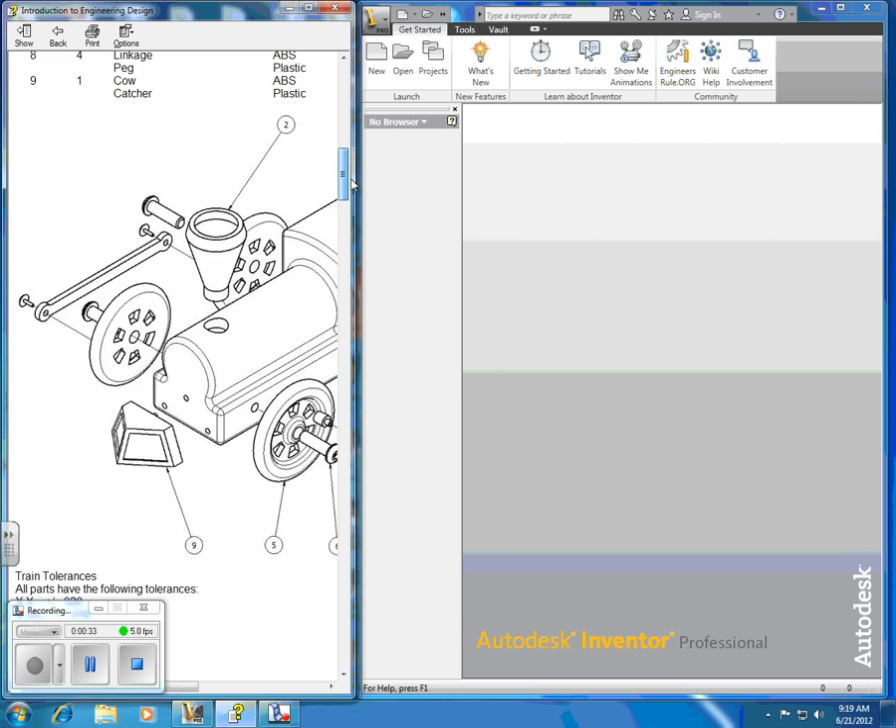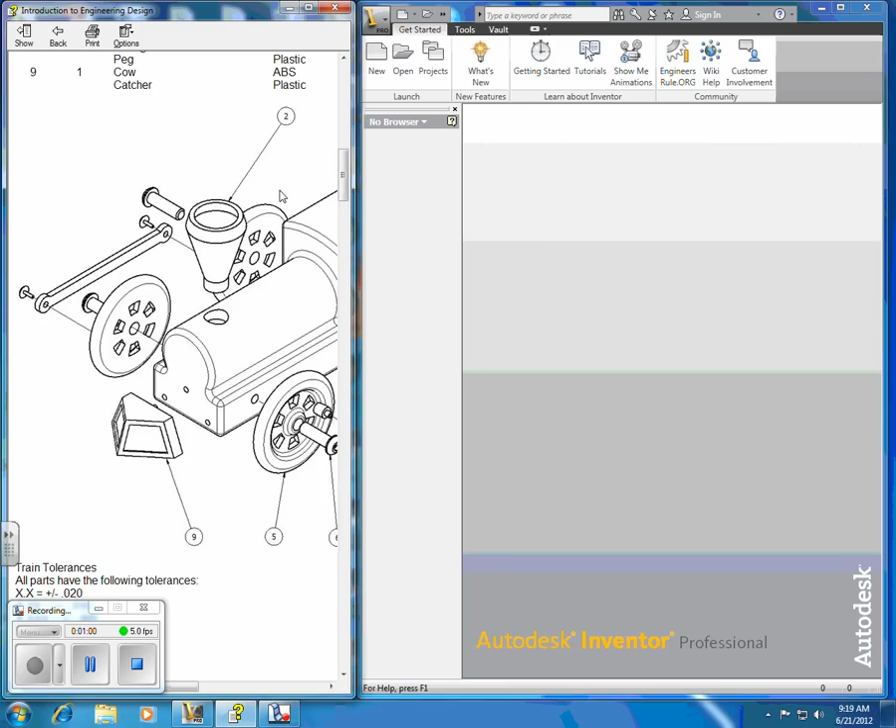For this project, what we're going to be doing is taking a series of train parts, and we're going to be inputting all of those dimensions and actually creating the 3D model. And then after we create all the 3D models, we're going to put them together into an assembly, and then we'll explode them and do an exploded assembly like you see here, with the parts tagged with balloons, and we'll also be able to create a parts list very similar to what we have here.

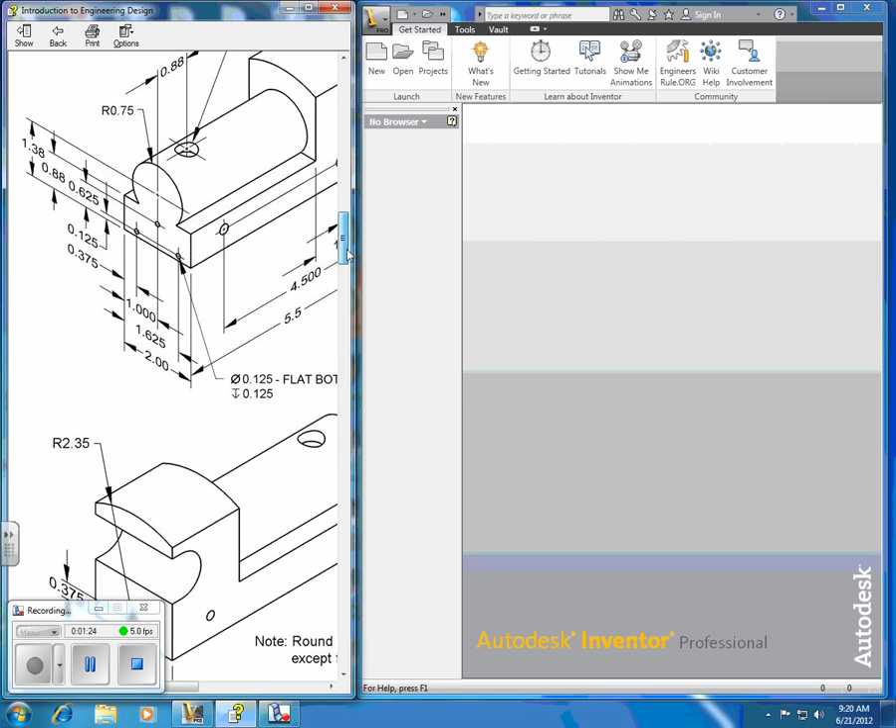And finally, we will create actual working drawings or detailed drawings that show each part in a 3-view front, top, and right side configuration. And that'll be later. So it's a pretty big project, but it's going to give you a lot of skills in Inventor and in creating the models, but also in drawing and detailing and putting in dimensions and all the specs that are needed to create that model in the factory.

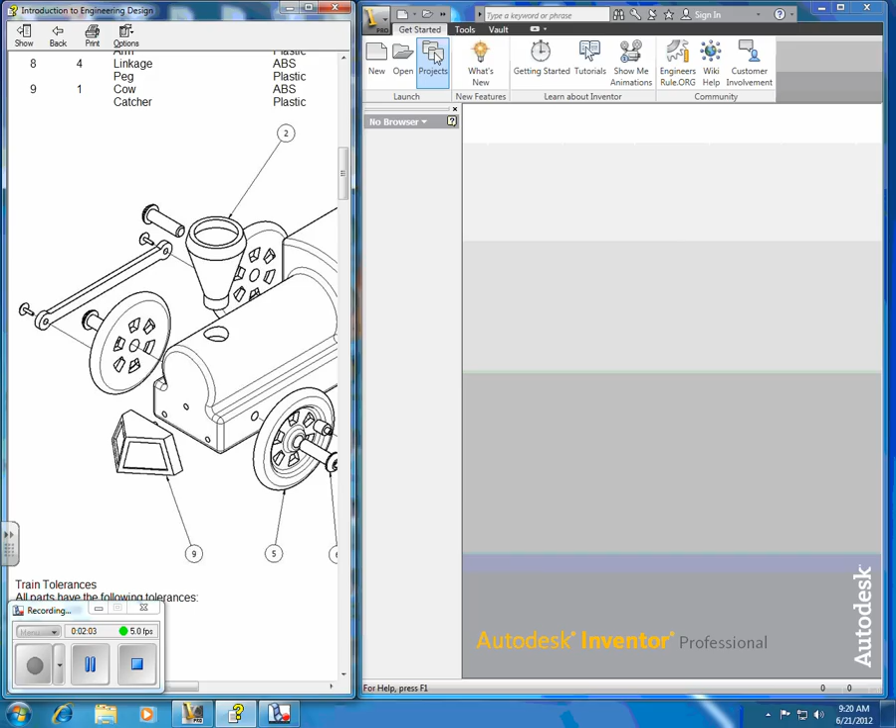So let's get started and take a look at the first part, which is the train body. And before I start any project like this, I always like to create a project within Inventor. So I'm going to come over here and click on Projects. And when I do that, this dialog box comes up. And as you can see, another project was selected, Button Maker. So I'm going to have to create a new project.

So to create a new project for the train, I'm going to go to New. And it's always going to be a single user project. We don't use any vault projects right now, and we don't have the software to do that anyway. So we're going to always select new single user project, and then we go to next. And then we're going to type in the project name, which is train. And really that's all you need, because we're not going to do anything else with that name.

And if you notice down here, it says project workspace folder. That is where all of your parts are going to get saved, unless you decide you're going to put them somewhere else. And I don't recommend you save anything in the C drive. The C drive is the hard drive that's on your particular computer. If that computer goes down, or if we lose the drive for whatever reason, or if you go to another computer, you will not be able to access that file.

So we're going to come over here to this button, which is the Browse button, and we're going to browse for a location. And I recommend you put your files in your P drive, at least temporarily until everything is done. If you put them in the O drive or in the K drive, you run the risk of somebody taking your parts or modifying them or deleting them, and you don't want that to happen. So to ensure the integrity of all your files, I would recommend you put it right into your P drive.

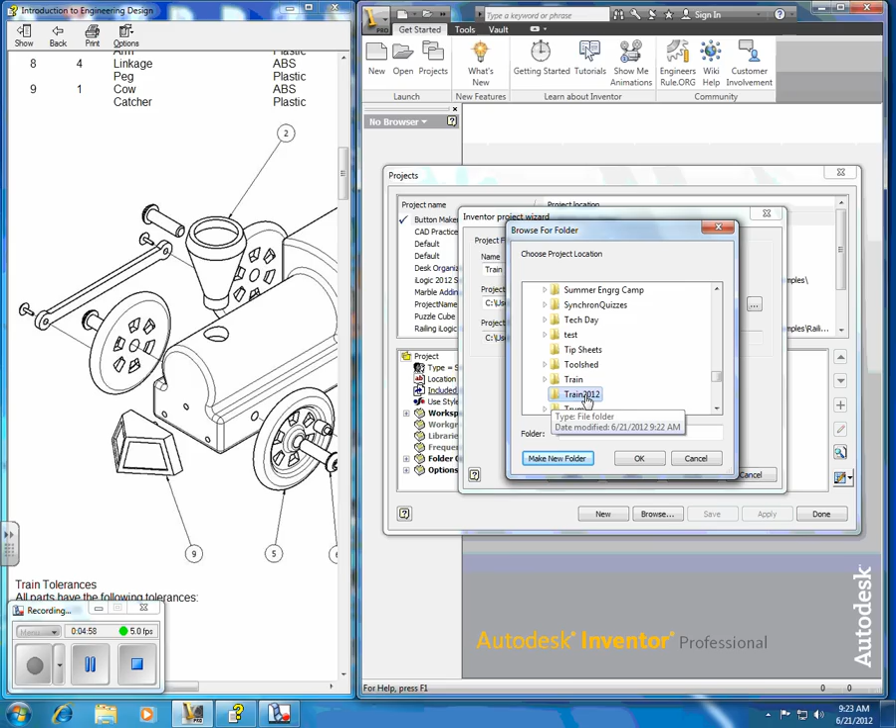And I think I already have a folder called Train because I've done this so many times, but I'm going to give it a 2012. I know I don't have a folder with that name. All right, and there it is. See, there's the one that I created previously, which I did in March when I was teaching this. And this one here is a new folder that I've created for this presentation. Okay, so now I have that folder, and what I'm going to want to do then is also just click on that.

Okay, so that's selected. Make sure that's selected, and then press OK. And if you notice, P drive / train 2012. So that's where all your parts are going to get filed. And that really comes in handy, especially if you're putting in lots of parts. And the thing you want to remember with Inventor is once you create an assembly, do not change the name of the parts that go into that assembly, because then the assembly will not find those parts.

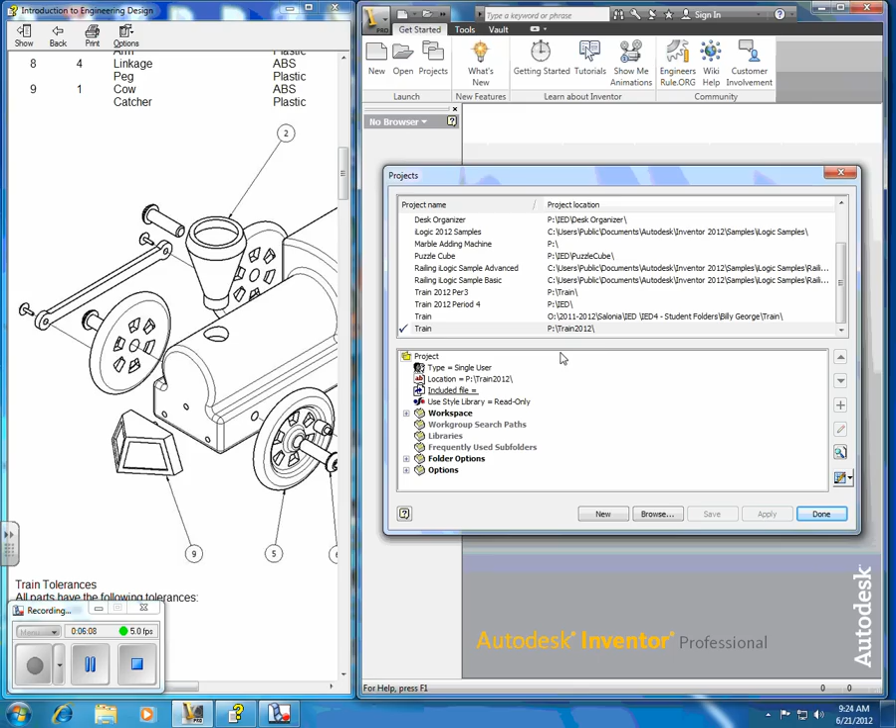Okay, so we've got that all set, and after you do that, the IPJ right here, that's just a suffix that means that is the folder. So we have in our P drive train 2012 and train.ipj. Okay, and we're going to go finish. And if you notice, there it is. Okay, P train 2012. And when we create the new part for the train body, it'll be appended right here. Okay, so press done, and now we're ready to go.

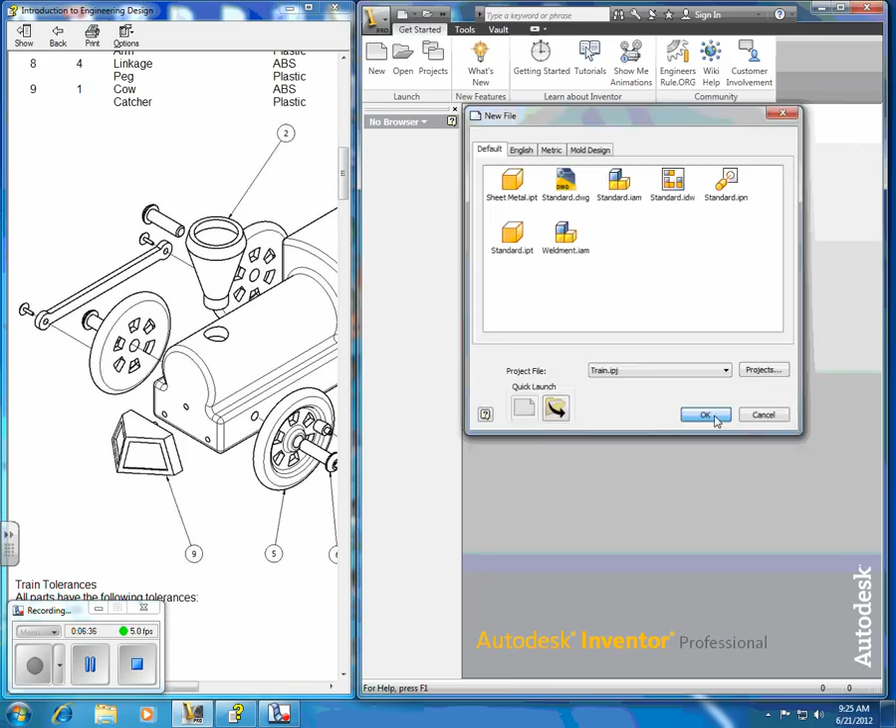So let's start a new part. And remember, don't come down and hit sheet metal. It's right here, standard.ipt. And you can either double click on it, or you can click and then click down here, OK. IPT, by the way, means Inventor part. Okay, that's where we always start with an Inventor part. Press OK, and you should get the grid coming up. When you see the grid, I like to keep it on grid because I can tell right away that I'm in 2D mode as opposed to 3D.

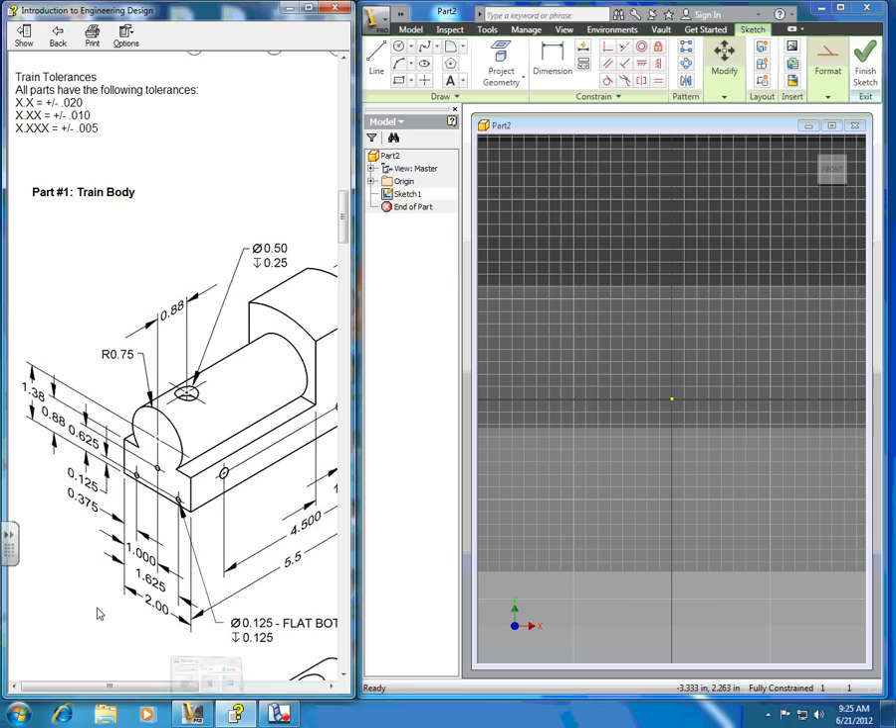And I'm going to take a look at the train body, which is the first part. And notice there's some general tolerances here, and that eventually will go on the drawing, but we don't have to worry about that right now. All we're going to do for this exercise is just copy all of the dimensions that you see here. Okay, and I'm just going to minimize this. All right, so let's get started.

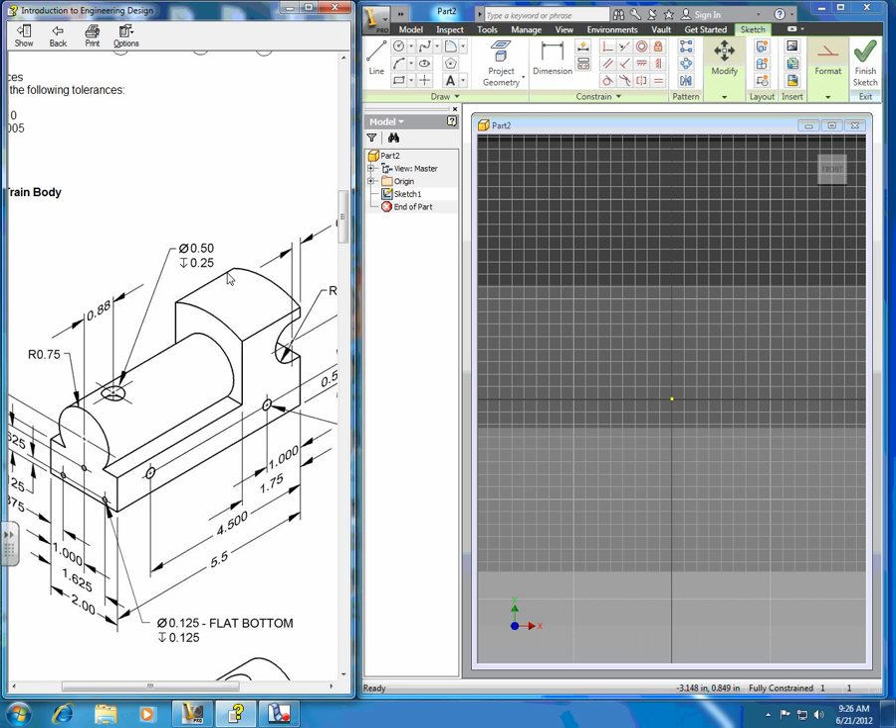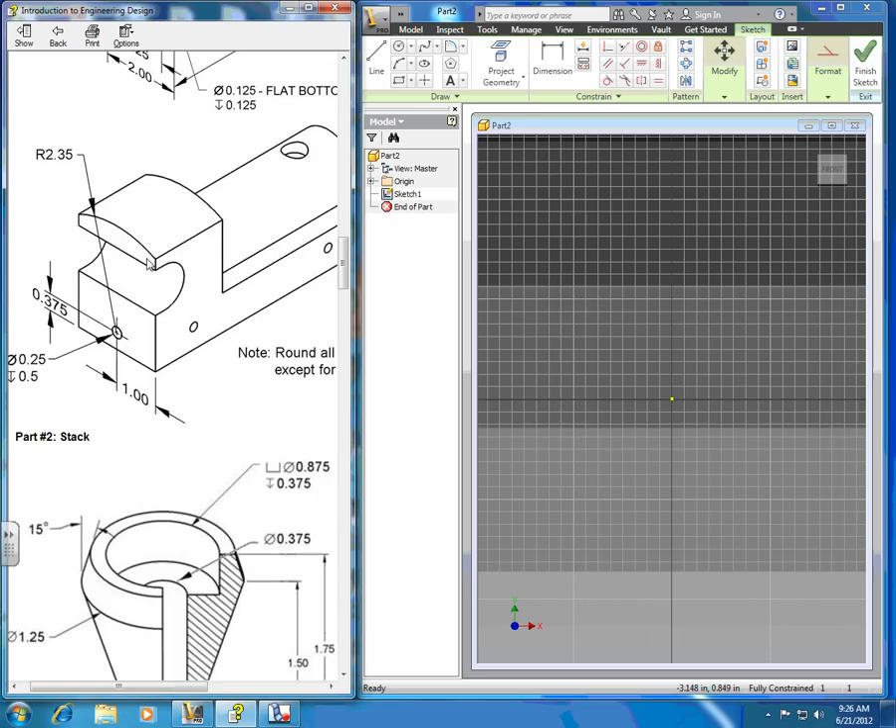Now, when we start to figure out how we're going to do this model, we want to try to think about how it'll be extruded. And we have this shape here, and we have this shape, and we could also do it this way, but we may have a little trouble doing that. So what we're going to do is the back side of this. I'm going to key in on this shape right here. So that's what we're going to draw first. So in order to do that, we have a couple of specs here. We need the height, we need the width, and then we need this radius right here. And this is all in inches, by the way.

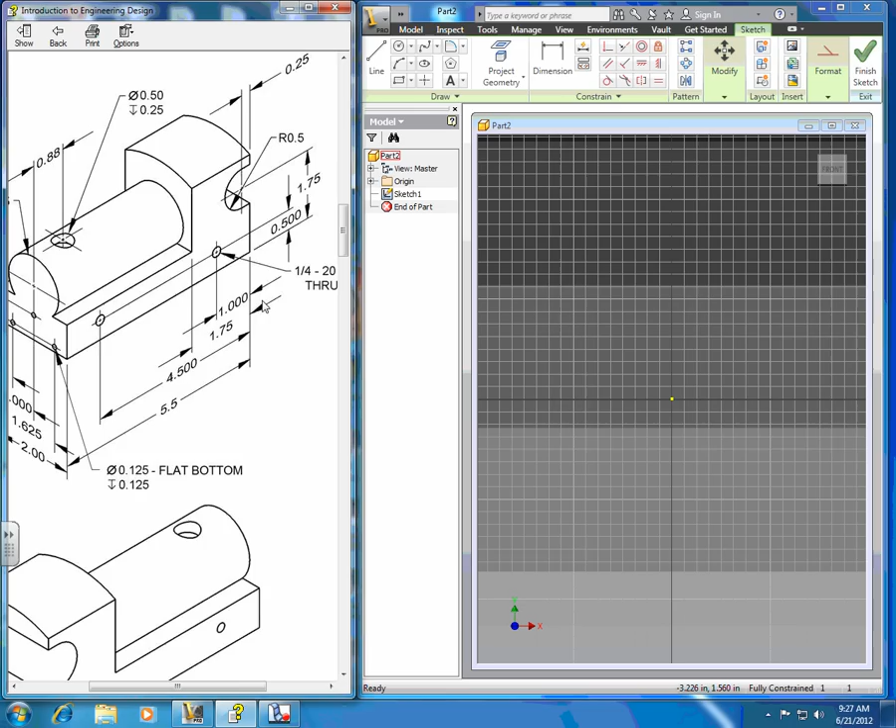All right. So how do we do that? Well, we are going to have to look at both drawings. We know that the width from here to here is 2 inches. And it's the same all the way back, so we don't have to worry about that, even though we're doing the back side. 2 inches wide, and it's a certain height. We don't know exactly what that height is because the height is determined by this radius here. So how can we do that? Well, we're going to have to put in our width, and then put in a point that's a certain distance away from the bottom, and then put in this arc, and then just kind of connect it. So let's see how we can do this.

We could do it a couple of ways. Well, let's do a rectangle. If you start with a rectangle, you're ensured that, number one, you have a closed loop. And also all of your corners are automatically 90 degrees, because that's the definition of a rectangle. All of your corners have to be 90 degrees. And we know that the width has to be 2 inches, so let's put that in. Dimension 2 inches.

Okay, and in terms of the height, we're really not sure yet how tall this has to be, but let's put in a point. If you find the center of this line, and then navigate up where you see a little dotted line, you're ensured that you're putting that point right in the center of this line, which is where we want it, because it has to be 1 inch away from this edge. And it has to be 0.375 from the bottom, so let's put that in. Click on the bottom edge, click on the point, and then bring it over. And that has to be 0.375.

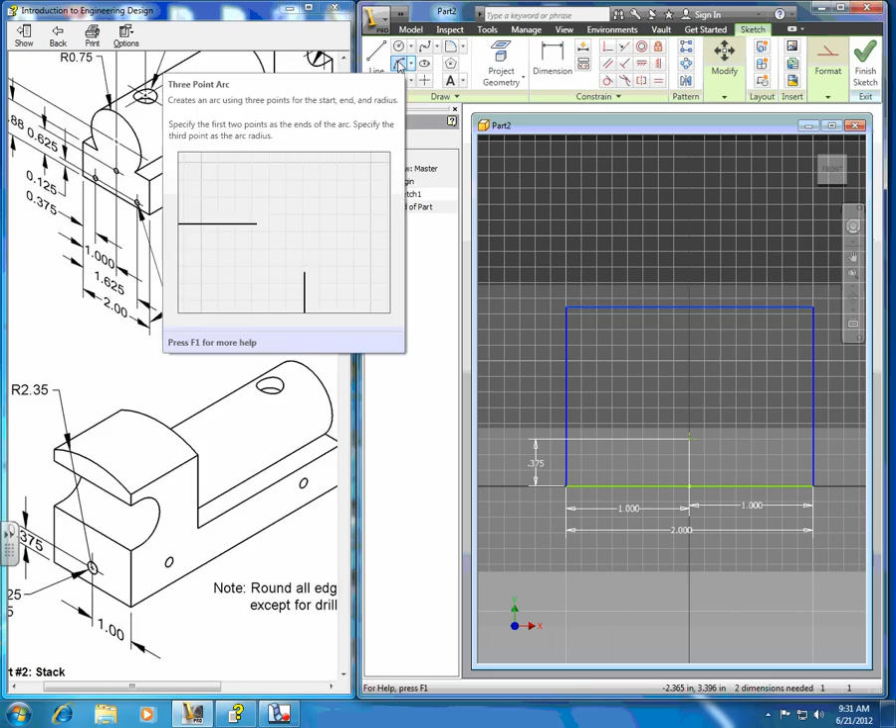Okay, and we're going to click on this edge. Then we're going to come over and click on this corner, and then bring it up. And we'll just leave it like right about here for now. I want to go somewhere above that center point that we just did. Okay, all right, so there it is.

Okay, and the other thing we want to do is put in a dimension, and if we look over here, it's got to be 2.35. So let's do that, dimension of this arc. So I'm going to click on the arc itself, and that has to be 2.35. Okay, so that gives us the correct dimension. But notice the point is way down here. Well, that point is supposed to be way up here.

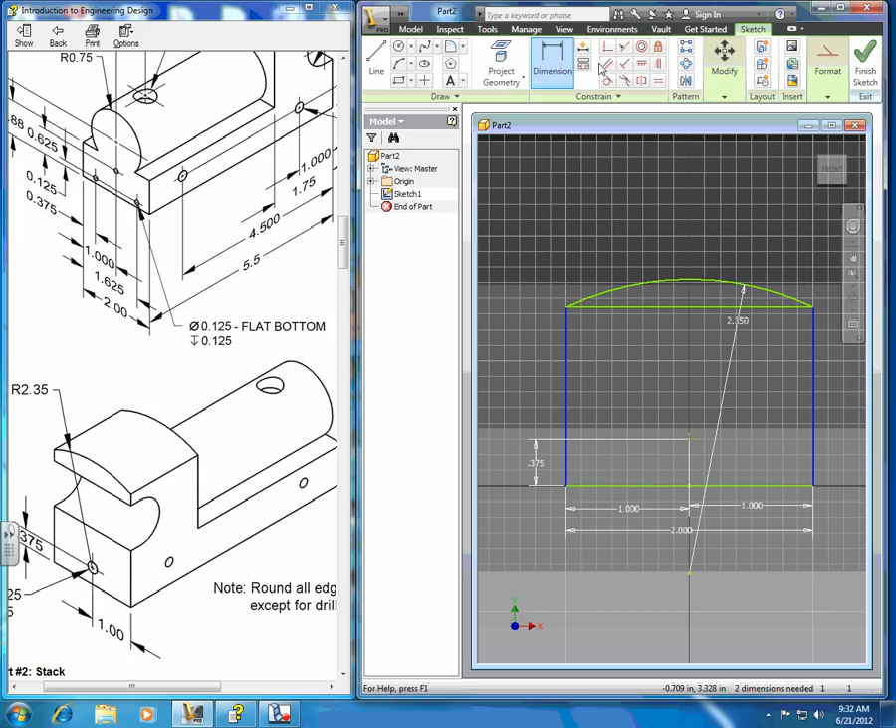So to change that, what we can do is go to one of our geometric constraints. It's called coincident. Coincident means we want this point and this point to share the same space. So this will be right on top of, or sharing the same space with this point. So let's go ahead and do that and see what happens. I'm going to click on this point, and I'm going to click on this point that we created earlier, and there we go. See? So what it did was it extended the model, and now we've got the correct dimension for the height. Notice the height just changed automatically.

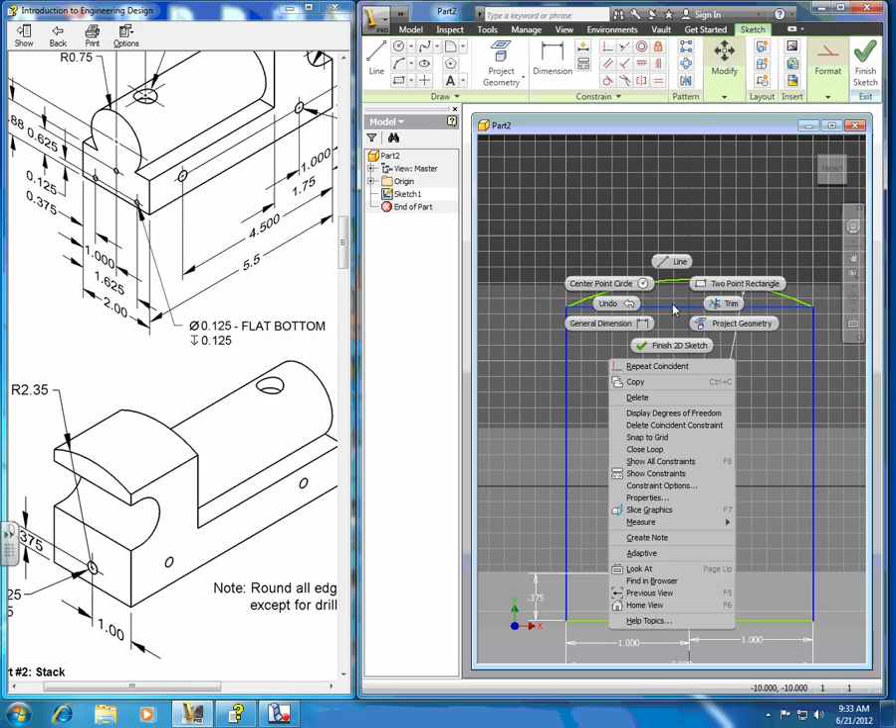The last thing we want to do is remove this line. Now there are two ways you can do that. The first way is just to right click on it, and well, first you have to get out of the command that you're in. Right click on that line and delete, which is down here. Okay. Or what I could have done was I could have just clicked on under modify, trim.

And the thing you want to remember about trim: trim works as long as there's no dimension on that particular line. If there's a dimension placed on that line, the trim command won't work, and you'll have to get rid of the dimension, then trim, and then put the dimension back in if you want to keep that dimension constrained to that number. Okay, so now we have the basic shape for the train body.

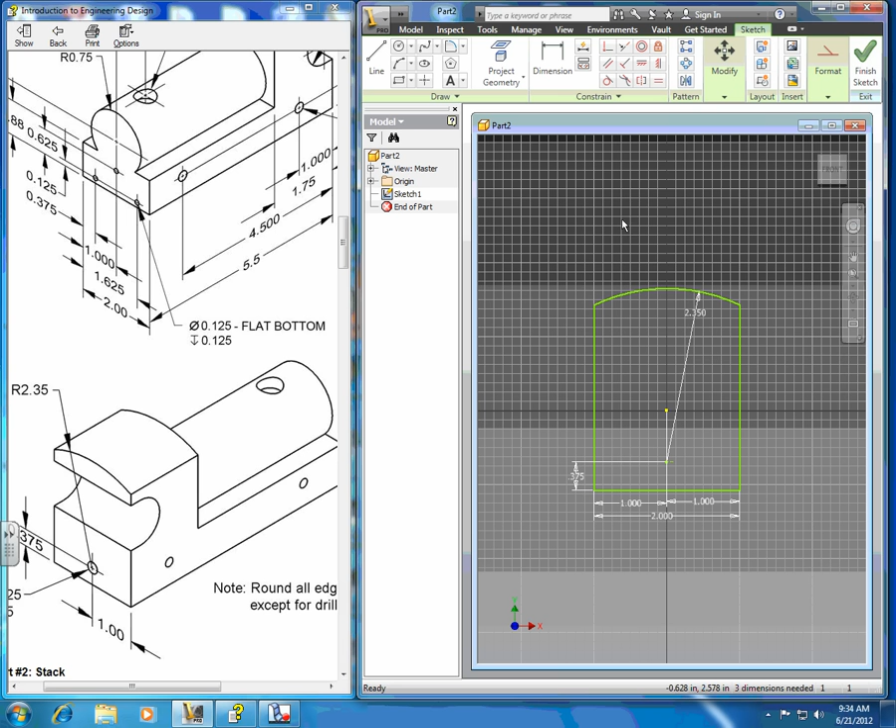Okay, and that's good enough. Don't get into the situation where you're trying to do a lot more than you should be doing. At this point, we have this shape here defined, and we're going to extrude it back this distance, which is 5.5. All right, so let's finish the sketch.

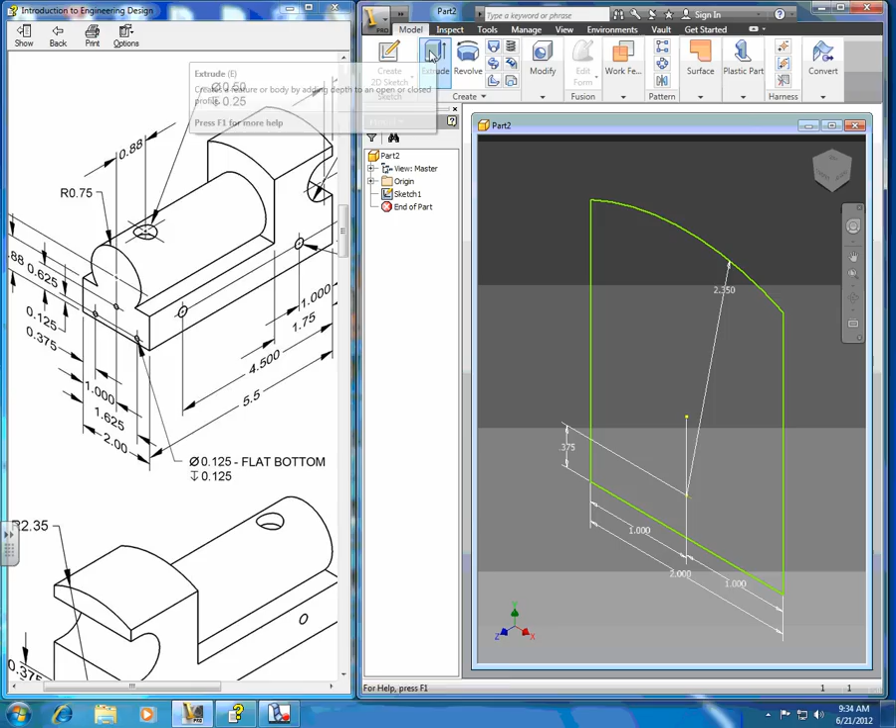And we're going to go to the extrude command, and we're going to put in the length, which is 5.5. All right, and I'm just going to zoom out a little bit by just turning my little jog wheel on my mouse, just like that.

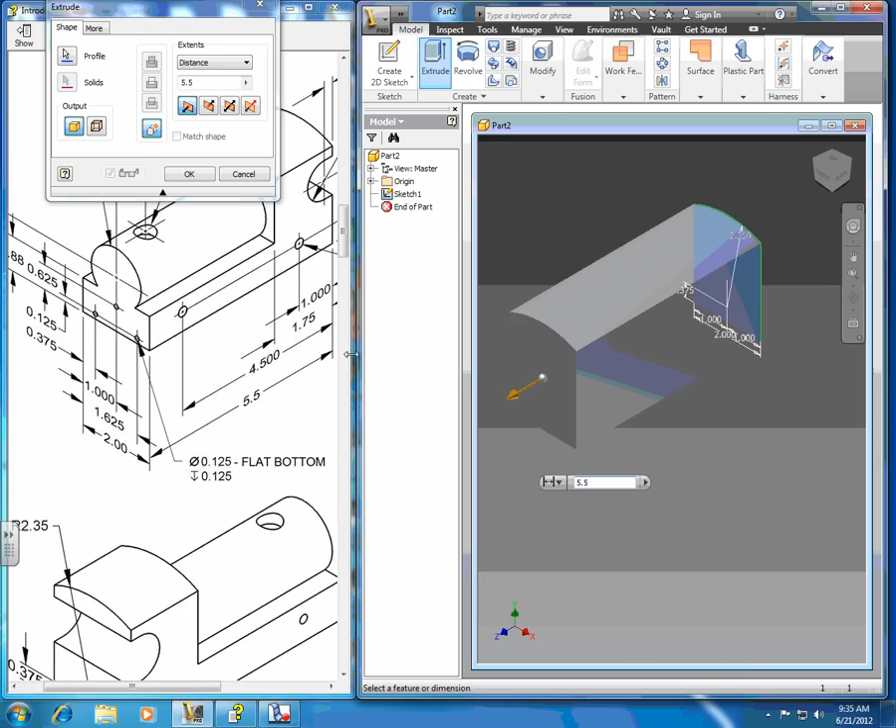And I'm extruding this way because remember we did the back, or the right side, if you will, of the part, right? So this is going to be the front of the part. This is, actually, yeah, this is the back. This is the front, so this will be the right side, and that is the back. All right, we got 5.5 put in. It's going the right way. We press OK. All right, so now we have our train body, the beginning of it.

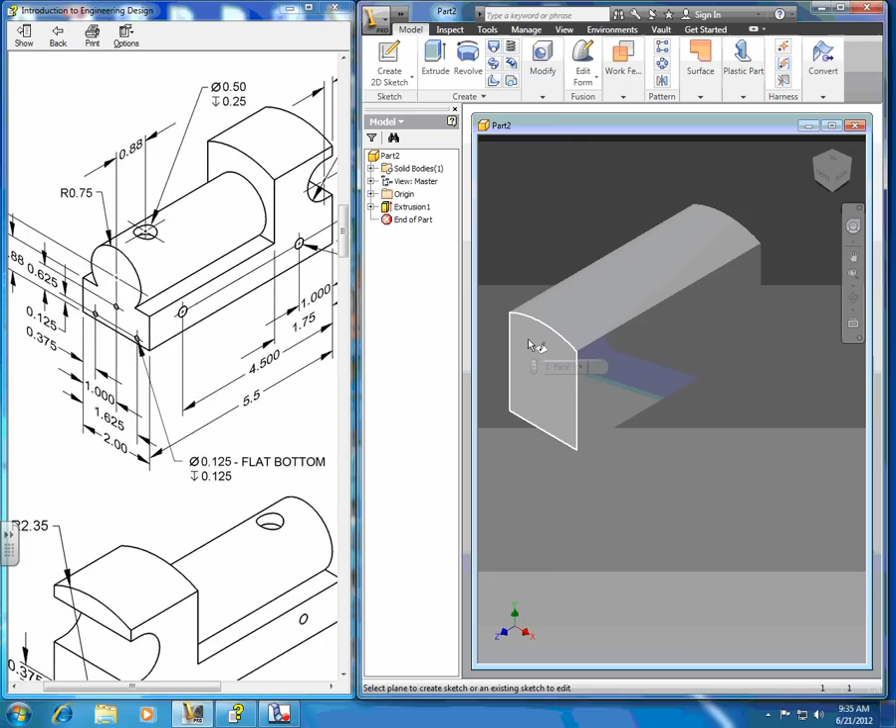All right, and that was called an additive process because we added material to a profile. Now we're going to do a subtractive process, which removes material from an existing shape. So to do that, we're going to create a 2D sketch right up here, and we're going to go to the front surface of the train body, and notice now we have a sketch, and we're going to try to put in this geometry right here.

Now when I look at this, I see a rectangle and I see a circle. Okay, so let's go ahead and do that. Let's put in a circle, and I'm going to start it maybe over here somewhere. The thing you want to be careful of too is if you hit the origin when you're making that circle, it'll actually force that circle to be tangent to that center mark, and then once you do that, you're not going to be able to change the size of the circle. So you want to be careful that you don't hit any existing points when you're making that first circle.

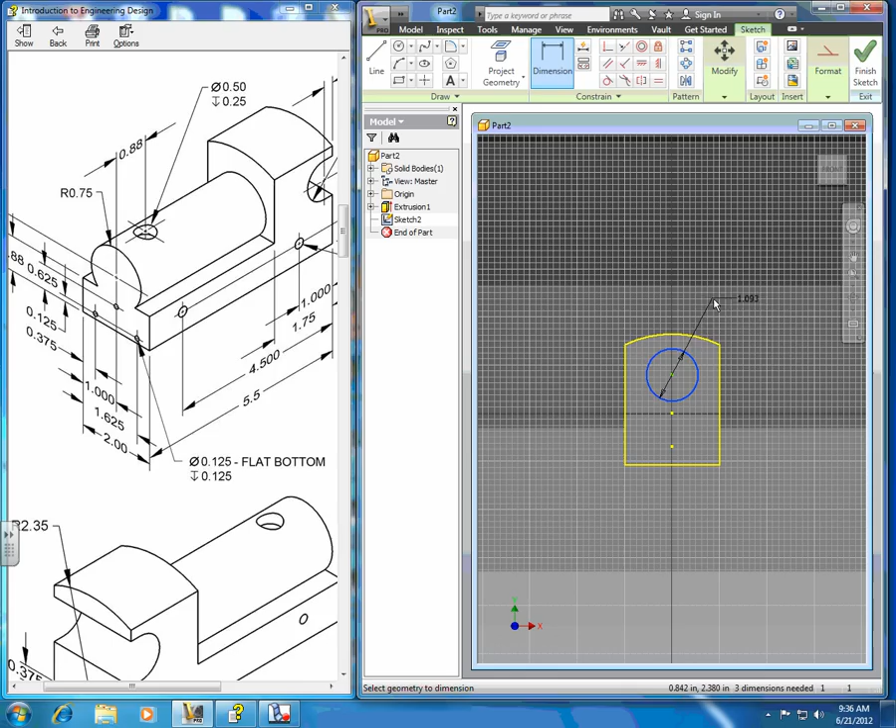Now that circle isn't the right size and it's not in the right location, but we're gonna fix that next. So let's go to dimension, and let's dimension the circle. Now if we look over here, we see that the circle has a radius of 0.75. But when we put this dimension in, we're putting in the diameter. So we're going to have to take 0.75 and multiply that times 2. And a really easy way to do that is just to type in 0.75, and then you're going to go Shift 8, which is the asterisk. That means times 2. And hit the check mark, and now we have the correct size circle.

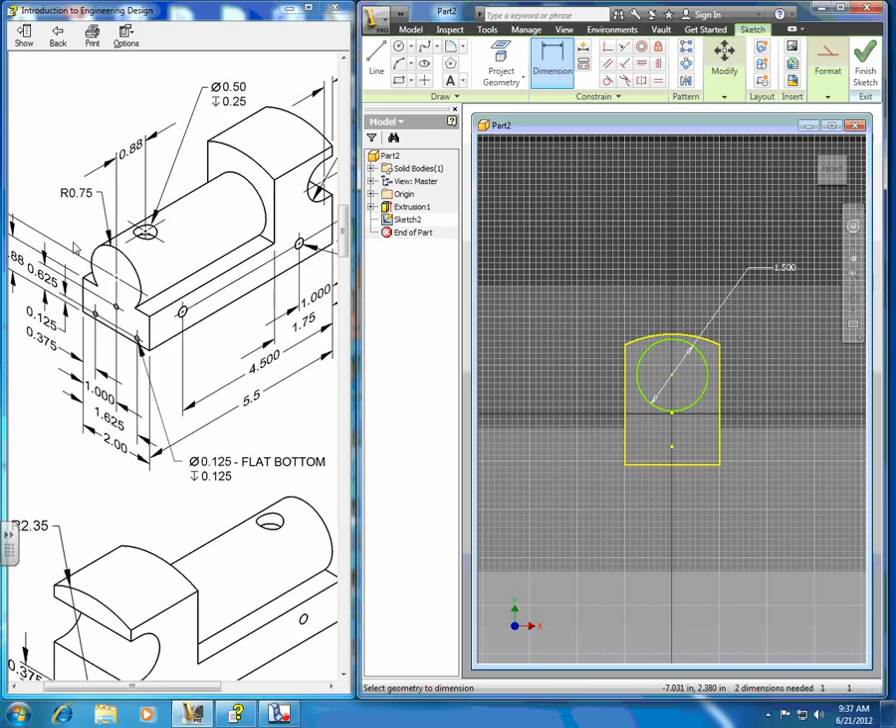Okay, but the circle isn't in the right location. It's got to come down from the top. See where it is here? So we have to locate that circle. Well, how do we do that? We come back to our drawing here. We see that the circle has to be in the center of the part. Okay, 1 inch. So if you go right to that center mark for the circle, and you just come down the extension line, you see that from this edge to the center of the circle has to be 1 inch. So let's put that in. From this edge to the center of the circle has to be 1 inch, which it is. I just happened to drop it in the center.

But now for this dimension, remember we always locate our circles from both directions. We have to locate them horizontally and vertically. So let's do the vertical distance, and the vertical distance has to be 1.38. See it? 1.38. So let's put that in.

Okay, looking good. Now what we need to do is draw, and we could do this again a couple of ways. We can either draw a rectangle or we could just draw a straight line. Let's just draw a straight line. And we're going to start at this edge, and make sure you're right on the edge when you start. You can kind of tell because you get that line there. Start right there, and just click, and don't worry about the location right now, but see the little perpendicular sign? Make sure you're drawing a perpendicular line. You're going to end right there on the other edge.

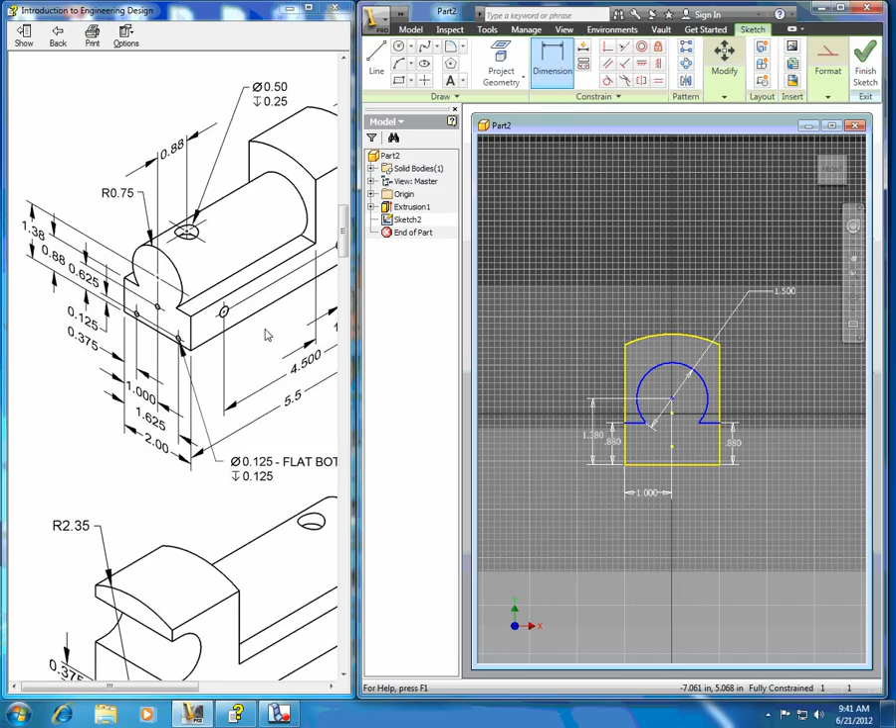Okay, so now we have kind of a boundary that allows us to cut this material away. We're going to cut this material away, but we're not going to cut it all the way through, because otherwise we wouldn't have the cab portion of the train body. Okay, so we're going to cut, but we're only going to cut this far. Okay, so let's finish our sketch, because there's nothing more to do here.

And we're going to select Extrude, but this time it's going to be cut. Okay, when you look at the box here, notice that, and same thing over here, you can do it either way. You can work out of this box, or you can work right over here, whatever's easier for you. But if you click on Profile, you're going to click where you want to cut out material.

Okay, and you always want to make sure too that if you're going to cut, this is the cut button right here. This is Extrude Join, which adds material. This is Extrude Cut, which cuts material away. And this is Intersect, which just cuts the intersection of the two shapes. So we want this one, which is cut. And we're going to click on this profile.

And notice it's going all the way through. We don't want that. So we need to figure out how far to go. Well, the entire length of the part is 5.5. And this part is 1.75. So we want to cut 5.5 minus 1.75. All right, so let's just put that in.

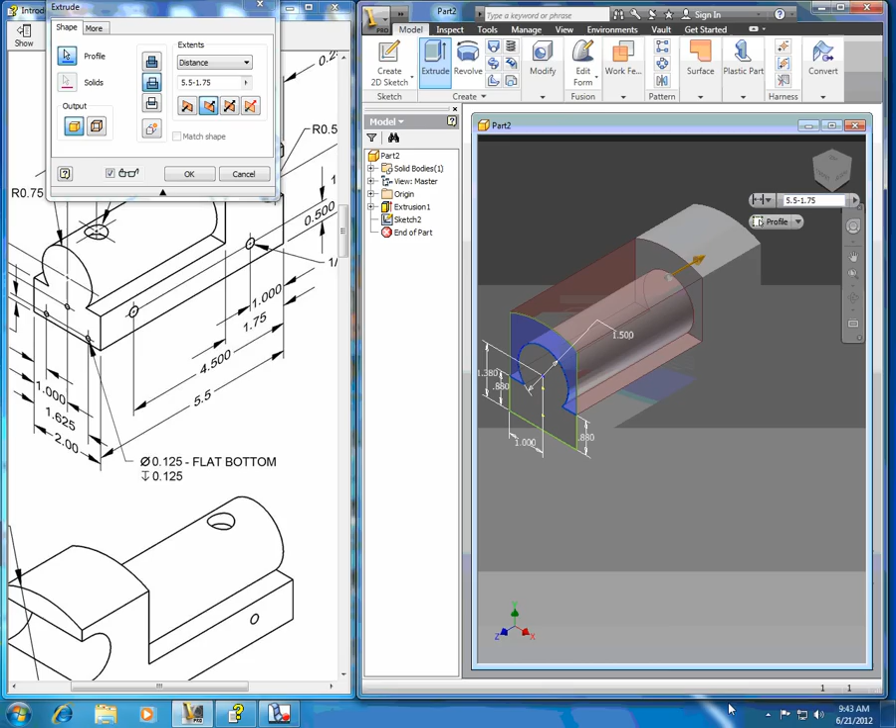5.5 minus, now see, that was highlighted, so what I should have done was just hit the cursor after it. 5.5 minus 1.75. And there we go. And if you press OK, it makes the cut. Okay, so there is a roughed out version of our train body.

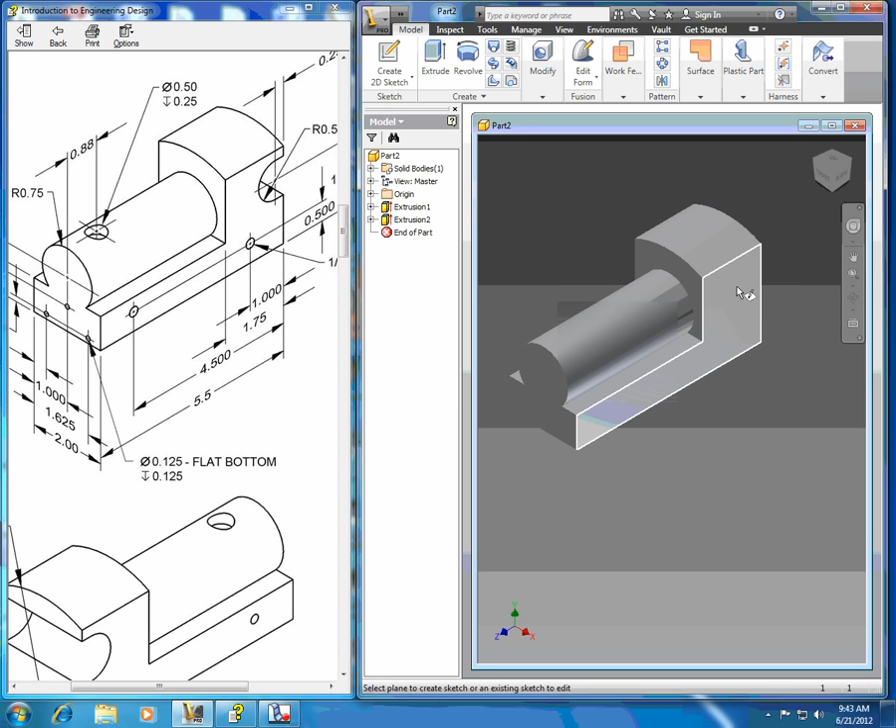Now we're not done yet. We still have more cutting to do. So let's cut out this D shape right here on the cab. Let's do that next. So we're going to need to create another sketch. Create 2D sketch. We're going to put that sketch right here. Click on the side. Okay.

And if we look at this carefully, the circle is here, but then there's a straight portion. So the center of the circle is not going to be on the edge. It's going to be in 1/4 of an inch. You see the speck right here. Okay. So the center of this circle is going to be 1/4 of an inch in, and it's going to be 1.75 inches from the bottom.

So let's go ahead and do that. Circle. And again, be careful. Don't put your circle, the center, on the edge, because you won't be able to get it off.

It'll constrain that center to this edge, and you'll have to get rid of the circle and or eliminate the constraint and redo it. So let's bring the circle in here somewhere. And again, when you're bringing it out, don't hit the edge. See the little tangent sign there, right there? What that would do is force that circle to stay tangent to that edge, but we don't want that. So we're just going to put it right there for now.

Notice the circle is green, so that means you can move it around. It's not constrained. Well, let's constrain it to the proper location. We also have to make the size correct, so let's do that. Remember, circles and holes need size and location dimensions. So we'll click on dimension, click on the edge of the circle, not the center, the edge.

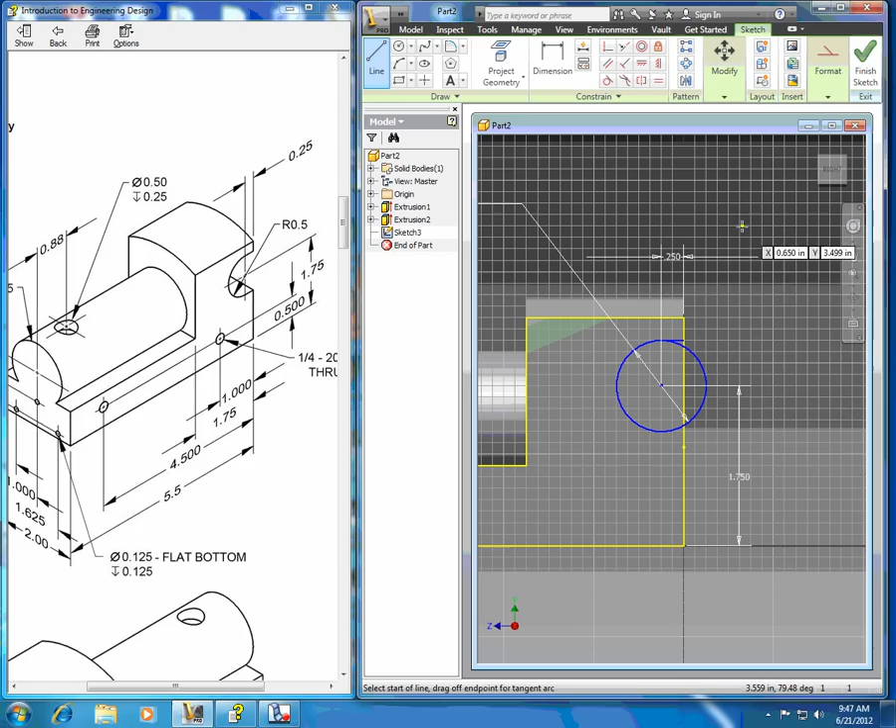Okay? If it comes green, that means you probably didn't hit the top in the circle, and it's not tangent. And I'll show you how to make it tangent in a second. All right, we have to do the same thing with the bottom. We're still on the line command. Now, say if I just was a little bit off here. Let's see if I can do that. I'm doing this on purpose here, just to show you. All right, it's a straight line. It's a horizontal line, but it's a little bit off from the circle, and I'm clicking on the very edge of the part. Notice it's green.

Okay, so if your line like that is green, you want to make this line tangent to this circle. So how do you do that? Well, we have a little geometric constraint here called tangent. So click on that, and we want to make this line tangent to this circle. And there it is. Okay, so it's as simple as that.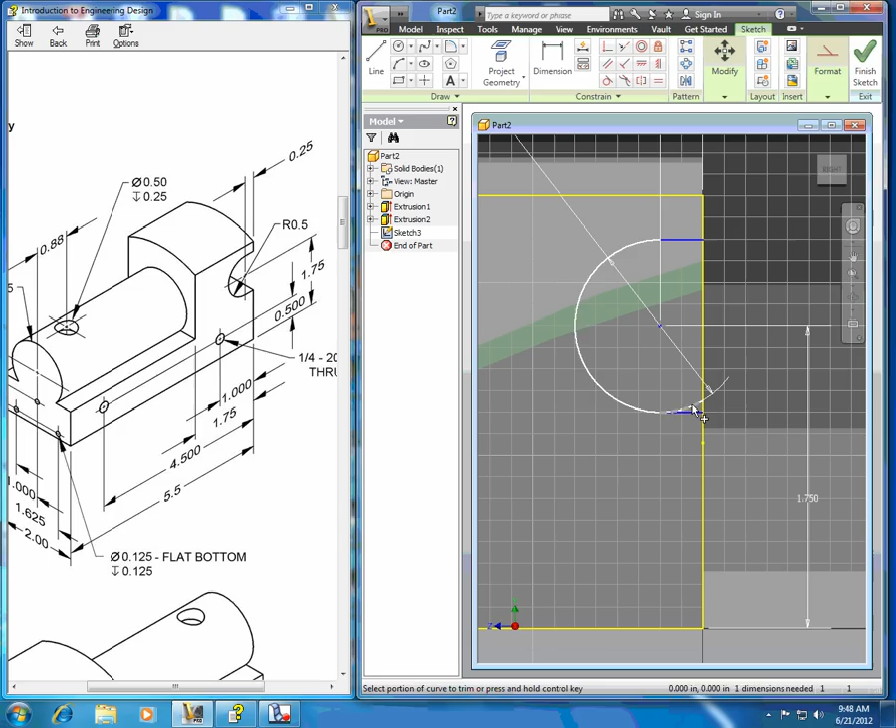Now we want to modify, trim the lines that don't belong. And we'll get rid of this line, and this line, and this line. And now we have our D shape that we want. Finish the sketch, and extrude cut. Oh, look at the save reminder. Part 2 and its dependents have not been saved, so click here to save. Okay, so that's probably a good idea to do. So let's save it.

And remember, we have to give it a name the first time, and we're going to call it train body, because that's the name of the part. Don't name it anything else. You want to name it the same way that it's named in the tutorial, train body. Don't worry about the part number right now. We can put the part number in later. Save. Okay, and notice how it changed right here. So if you look up here, this is the part that you're working on. Train Body.ipt is the file name for this part.

Okay, so let's continue. Extrude, cut this profile. You want this, not that. You want that profile. And notice it goes all the way through. That's fine.

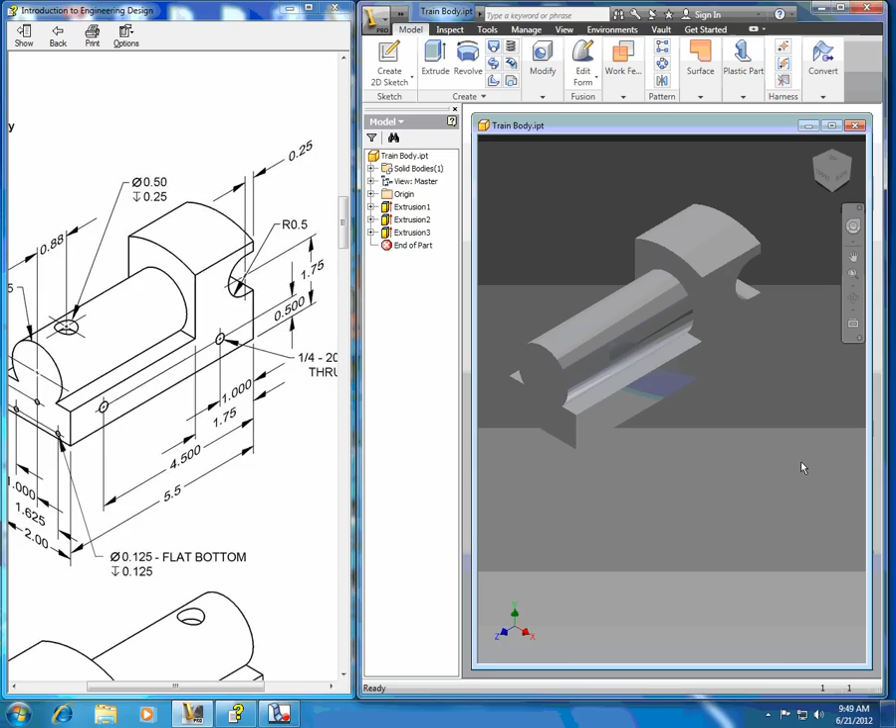Okay, as long as it's going all the way through. And if we press OK, it makes the cut, and that part of it is done. Okay, now let's put in some holes.

Now, if we look at these holes, we have to again look at the holes carefully. This leader line is pointing to one of the holes, but it's the same thing for all three. How do we know that? Well, it's kind of implied, but really what they should have said was either typical or 3 times or 3 places. So we'll fix that when we do the detailed drawing.

It has to be a flat bottom hole, okay? And this little null set, which usually means 0 in math, that means diameter. So the hole has to have a diameter of 0.125 or 1/8 of an inch. It has to have a flat bottom. This little arrow pointing down means drilled to a depth of 0.125. All right, so how do we do that?

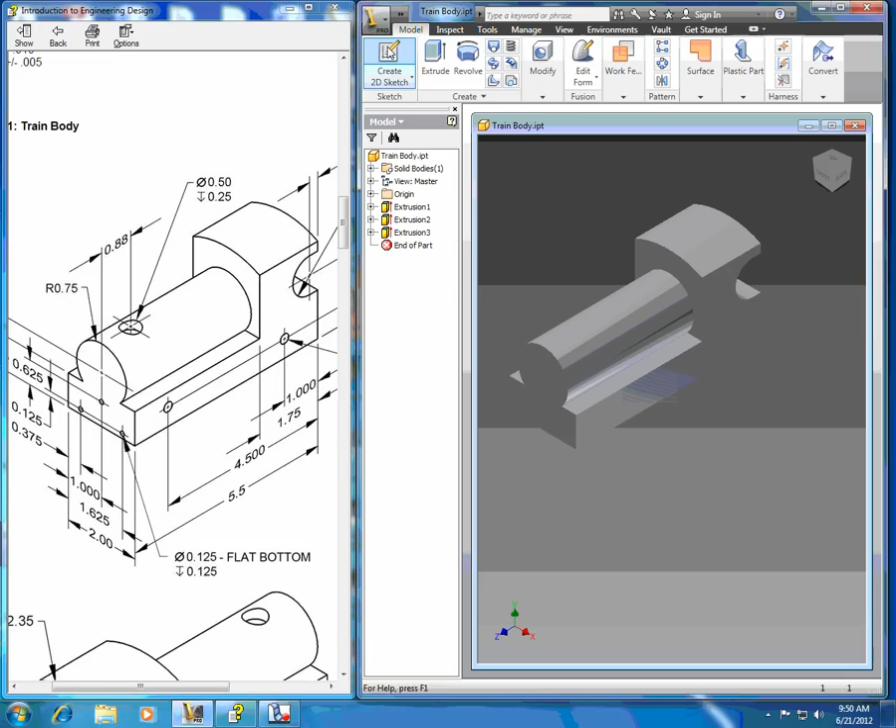Well, the best way to drill a hole is to create a point. So to do that, we need a new sketch, create 2D sketch, click on the front, and we're going to go to point, and we're going to put in 3 points. 1, 2, and I want to get it in the middle. So I'm going to start down here, find the green dot, and move up 3. Okay, I have my 3 points.

Now I have to locate them. So let's locate 3 points. Well, if we look here, datum dimensioning, they're all starting from this edge. So we're going to do it the same way. We're going to click on this edge, and we're going to go 0.375 to the center of the first hole, 1 inch to the center of the second hole, 1.625 to the center of the third hole.

So let's do that. Okay, dimension, edge, center, 0.375, edge, center, 1 inch. Okay, that one's good. Don't have to change that one. Edge, center, 1.625. Okay, now all of the holes are located properly in the horizontal direction.

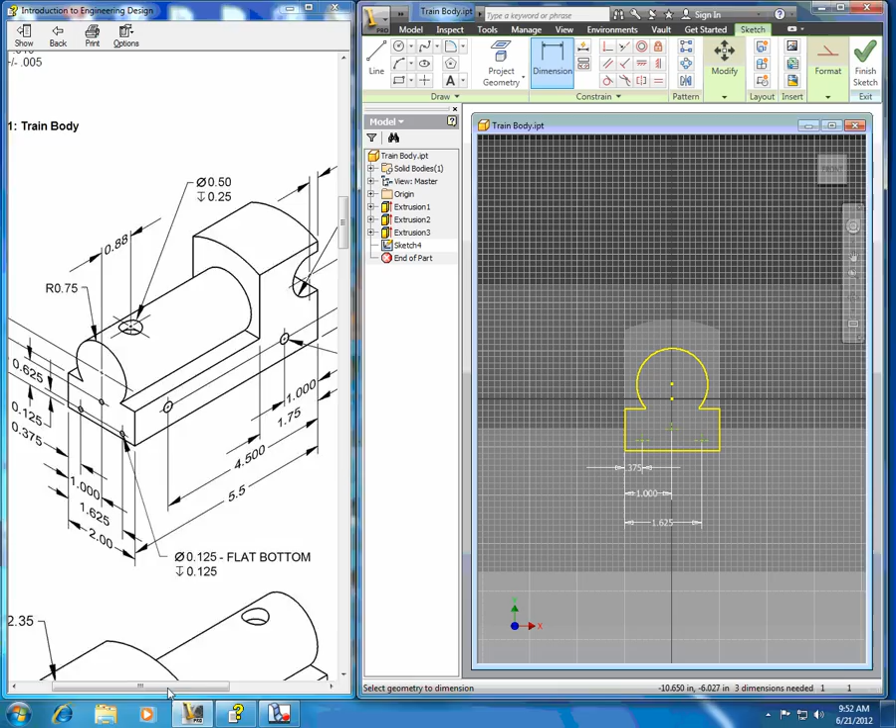Now we have to locate them in the vertical direction. So let's look over here at our drawing again. The first hole is 0.125 from the bottom. The second hole is 0.625. Now these holes are in line with each other. So you have to make sure that both of these holes are 0.125 from the bottom. You can't just change this hole and expect that this is going to go along with it, unless you make those 2 points horizontal with each other, which I can show you how to do.

All right, so let's do that. This geometric constraint is horizontal. Okay, so what that means is, if we press that, we click on the first point, we click on the second point, now they'll always be horizontal with each other. So if I changed the dimension of this point, this one should automatically update and be the same. Okay, so let's do that.

Dimension, bottom edge to the first point, and it's going to be what? Right here, 0.125. See how this one moved along with it, and they're in blue? So those points are fully constrained. They're not going to move now. Now we still have to do this one.

And that one there has to be, remember, 0.625. So let's do that. Bottom edge to the point, and we're going to come out here, and it's going to be 0.625. Okay? Right there. 0.625. Check. Okay. Now all 3 points are in the right location horizontally and vertically. And that is all we do to get the points started.

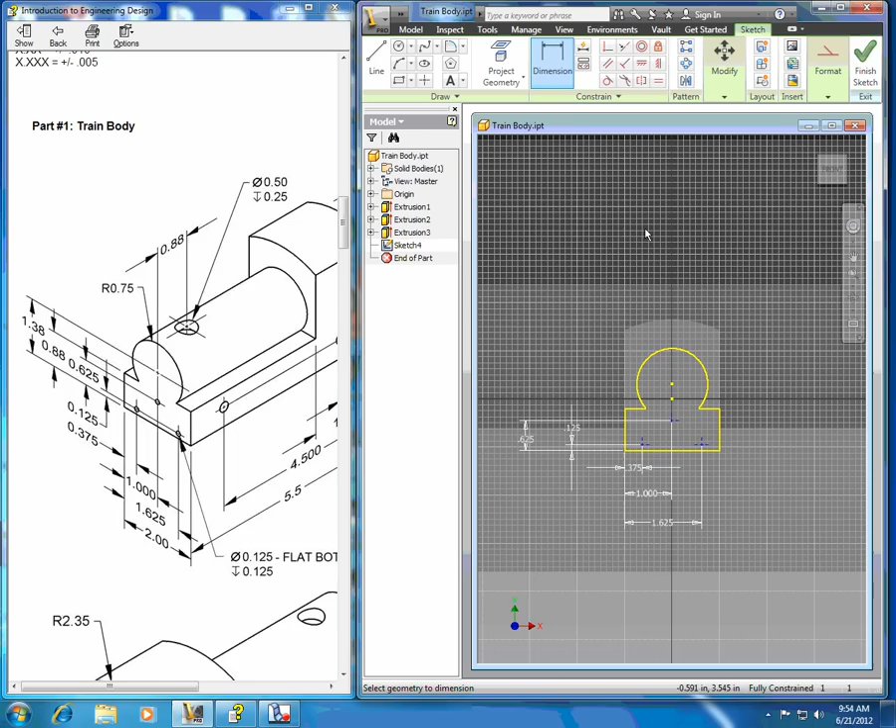All right, we need a center point. You can't drill a hole without a center point. So let's finish the sketch, and now let's put in a hole. A hole can be found under, where is it? It's around here somewhere. Modify. There it is. Okay, so modify. And you know, if you had your toolbar spread out, it would probably show. But because the toolbar is compressed, a lot of these commands are hidden under some of these higher level commands. So we're going to click on hole.

Now, we have lots of different options here. This is the one we use the most often. That's just a regular hole. And if you just kind of put your cursor there, sometimes it tells you what it is. In this case, it isn't for some reason, but this is a regular hole, regular drilled hole. This is a counterbore hole, which has this little shoulder to accept a bolt head, and it'll be flush, either flush with the surface or maybe a little below. This is a spot face, which is just a shallow counterbore, and this is countersink, which is for a flathead screw.

Okay, so we're gonna choose this one because we just want a regular hole, and it says flat bottom, so that means the drill point has to be a flat bottom. But let me see, it's not letting me do that, and that's because I haven't specified what centers. So if I go to centers, all of these should light up. Okay.

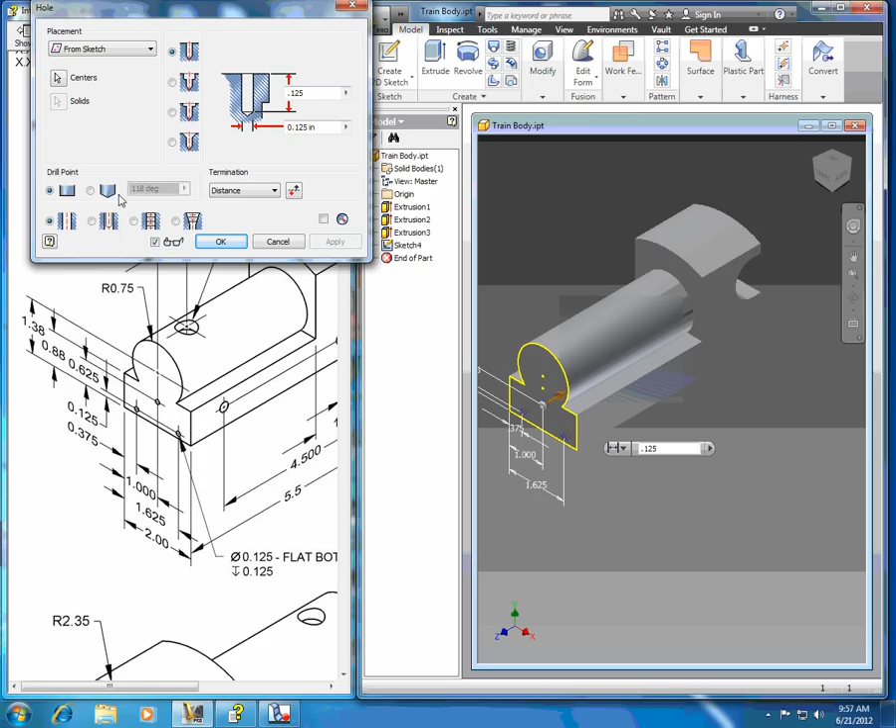Press OK, and we have our 3 holes drilled. See? And if you go like this with your cursor, you can kind of see that it is a flat bottom, and it's 1/8 of an inch in depth. Same as the diameter. Okay, good.

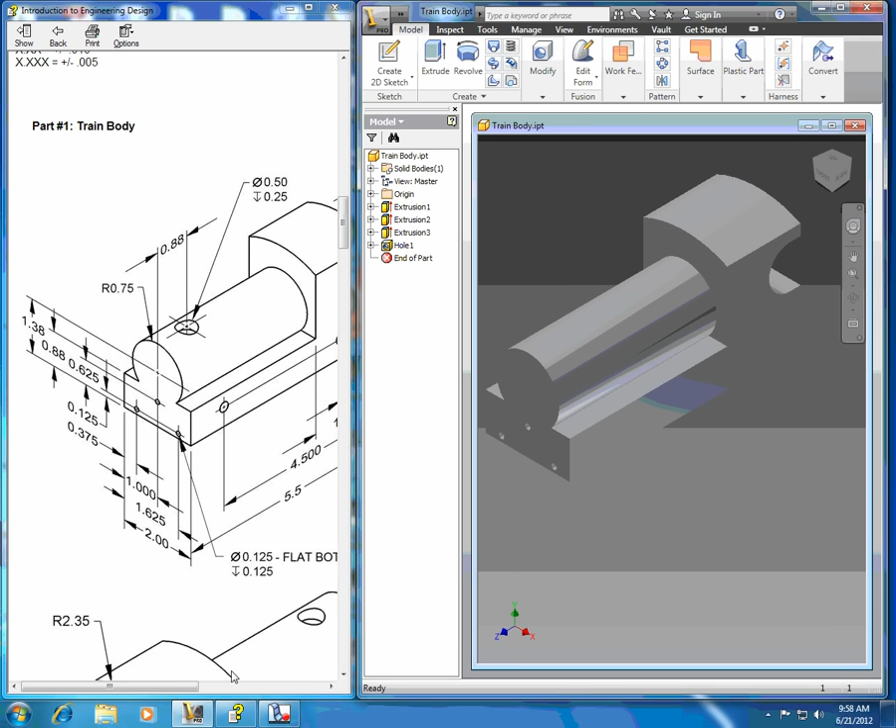Now we're going to do the same thing, but we have these holes, and these are cross holes, but these holes are a little different. These have threads in them. They're called tapped holes, and there are 2 of them, and they're the same. 1/4-20 is the thread designation. That means it's a 1/4 inch diameter, 20 threads per inch. Unified National Coarse, which is a designation for the thread that refers to how close the threads are to each other. And through means it goes all the way through the part, times 2 means it's in 2 places.

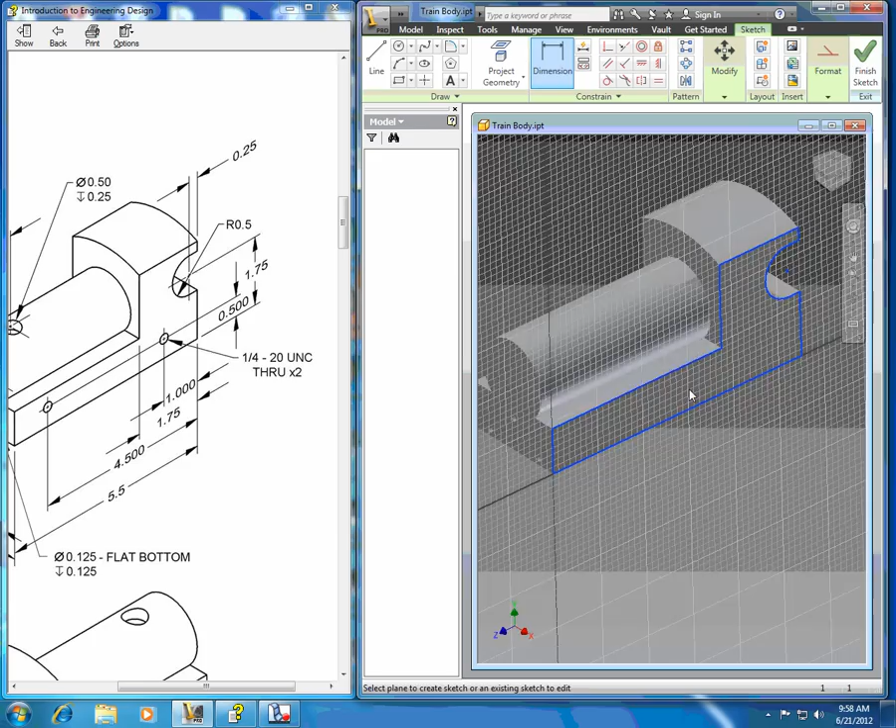So let's do that. Create a sketch here, point. We'll put in 2 points. 1, 2. And we're going to locate those 2 points. So we're going to go to Dimension. And the first one is going to be 1 inch from the back. Notice that the dimensions come from the back edge. So that means this is the datum. The datum is always the starting point for the dimensions.

So let's go to the back and go to the first point, and that has to be 1 inch. So we'll put that in. And if you just type in a 1, that gives you 1 inch. You don't need to type 1.000. It's a lot quicker. And we're going to go from the same back edge, not from here, but from the same back edge to the second point, and that's going to be 4.5 inches. There you go.

Now remember, we also have to locate these vertically. So once again, we're going to use our horizontal constraint. We're going to click on this point, and we're going to click on this point, and now they're horizontal to each other. They're always going to stay together. And we're going to go 0.5 from the bottom to the center. And remember, we're always locating to the center of holes and circles.

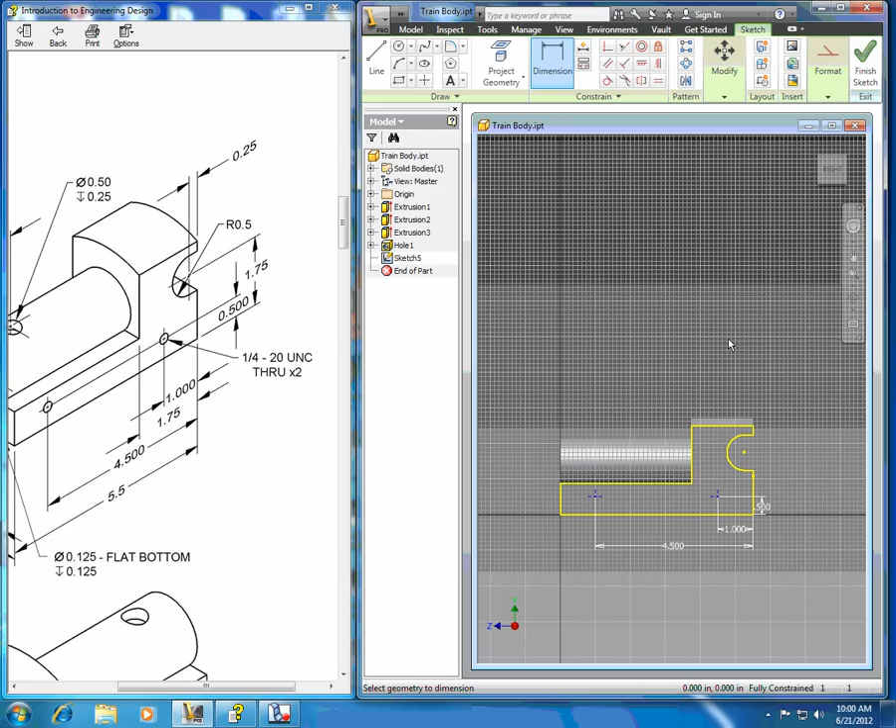Go back to hole again, which we said was under Modify. Hole. And notice it already knows where the points are, and it puts a preview in. But we don't want the holes. Oh, we do want the holes to go all the way through, don't we? So, but we just don't want to make a hole. We want to make a special type of hole called a tapped hole. So that means we're going to come down here.

All right, and this is just a regular hole. This is a clearance hole. This is the tapped hole. So that's the symbol, which means tapped. Tapped means there are threads inside the hole so that we can put in some type of a screw type fastener to keep the wheels on. So let's come down here now. We have to make sure that we've got the proper designation.

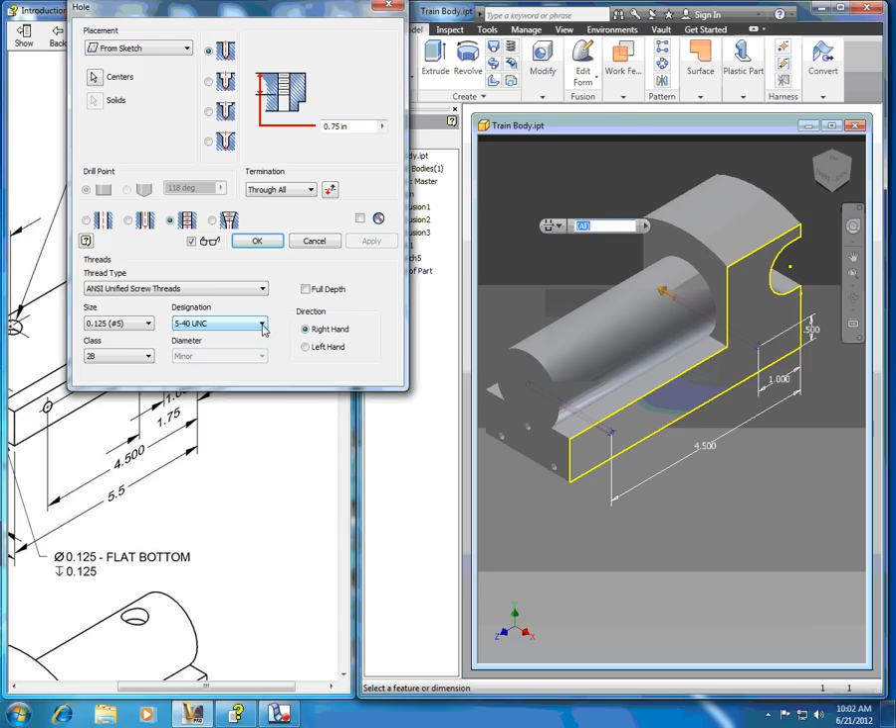Let's see. Our holes are supposed to be 1/4 20 UNC. Okay. Well, that's not a 1/4 20 UNC, is it? So let's open this up. Okay, see, this is 0.125. A 1/4 inch is 0.25, right? So let's click on that. And notice this automatically goes to a 1/4 20 UNC.

If you click on this down arrow here, you've got several different ones to choose from. But notice that for 1/4 20, UNC is basically it. That means that is a coarse thread for 1/4 20. If it was a 1/4 24, it would be Unified National Special, and this would be Unified National Fine, and this would be Extra Fine.

So as you get into fine and extra fine, you notice that there's more threads per inch, which means the threads are located closer to each other. Okay, 20 threads per inch, 24, 27, that's what that means. So they kind of go together, the threads per inch and this Unified National designation. Okay, so we're going to put that in.

One thing though, look, it's not threaded all the way through. We want it to be threaded all the way through, so we have to come down here and click on full depth. And notice now it's threaded all the way through. Okay, and that's about it. That's all we have to do. Click OK, and our threads have been put in. So what it did was it drilled and tapped the 2 holes. And if you notice, it does go all the way through. So that's good. Go back to our home view here.

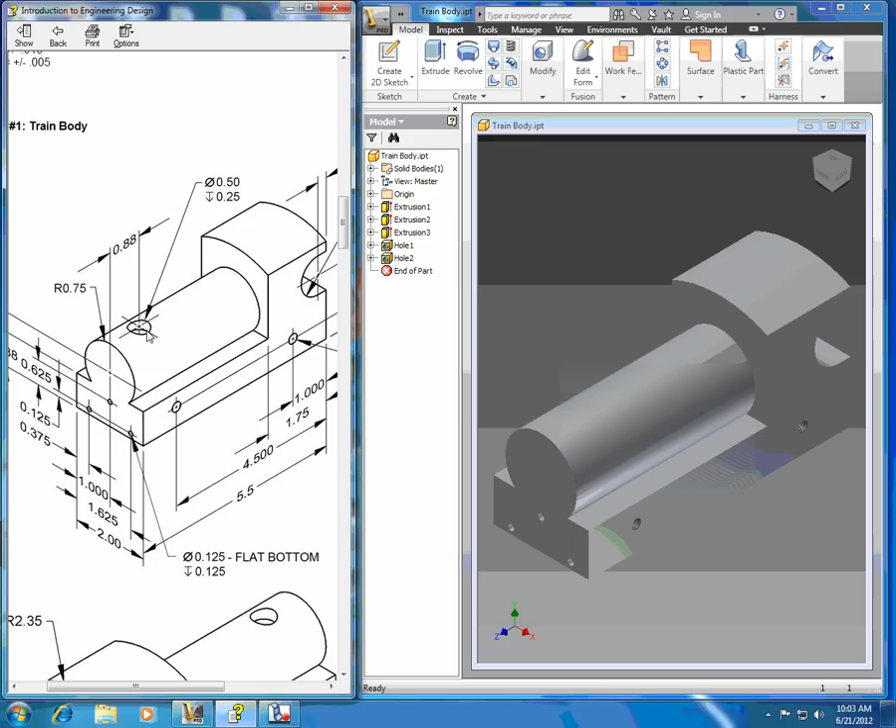All right, what else do we have to do? Anything else? Oh, we have to drill the hole for the stack. And this is the last thing that we're going to need to do. Actually, we're going to put the fillets on the outside and inside, but we'll do that at the very end. But if you notice here, we have a hole for the stack, but it's on a curved surface. Okay, and you cannot drill a hole into a curved surface.

So what we need to do is create a work plane, and we're going to put a work plane on the top here, tangent to this cylinder. And then once we have the work plane, which is flat by definition, we'll be able to put a sketch on that work plane. So how do you do all that? Well, you just come up here to where it says Work Features, click on that, and then I always come over here to Origin, and I open up the Origin, and notice you have different planes available, different orientations. You got three. You got the YZ plane, the XZ plane, and the XY plane.

Which one do you think we're going to need? You're right, we're going to need the XZ plane. So let's just click on that. But notice the plane's not in the right position. In order to get the plane on the top and make it tangent to the cylinder, you want to come over here with your cursor and right up to the top here. And you should be able to. For some reason, it's not doing it. Oh. Okay, somehow I missed that. This has got to be clicked. So you have to click that, and you have to click this, and then come up here.

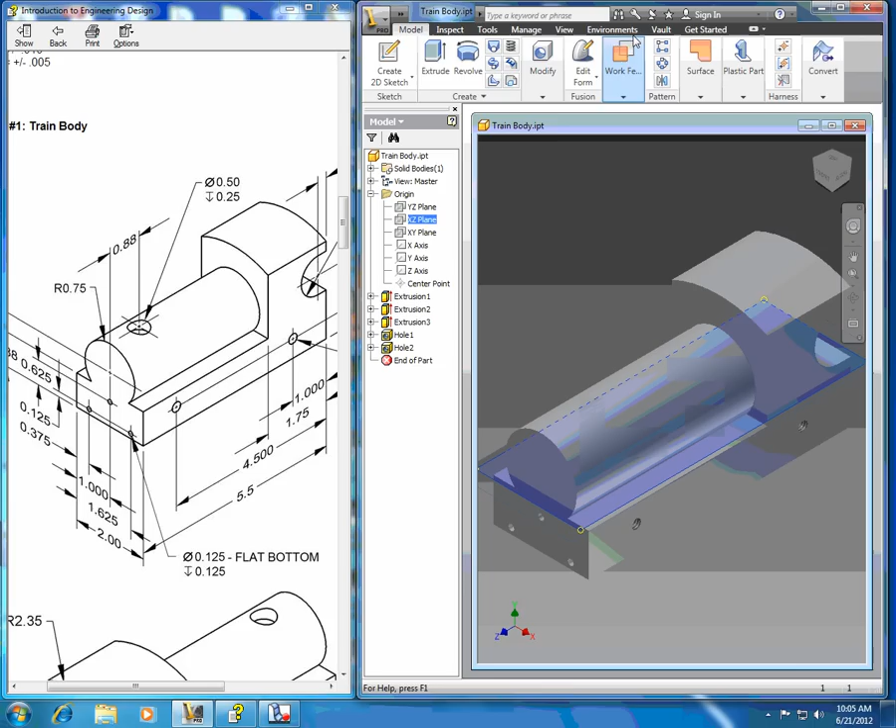That's interesting. It's not doing it. Plane. Oh, maybe because I'm clicked on Work Features and not plane down here, because I'm in a compressed mode. I'm not used to that. Okay, let's try that. Plane. There it is. That's what you want. Okay, so if you're working in a compressed mode, that's interesting. I learn all the time when I'm doing this. You have to come down here and click the plane down here, see, because you've got these different choices and it doesn't know which one.

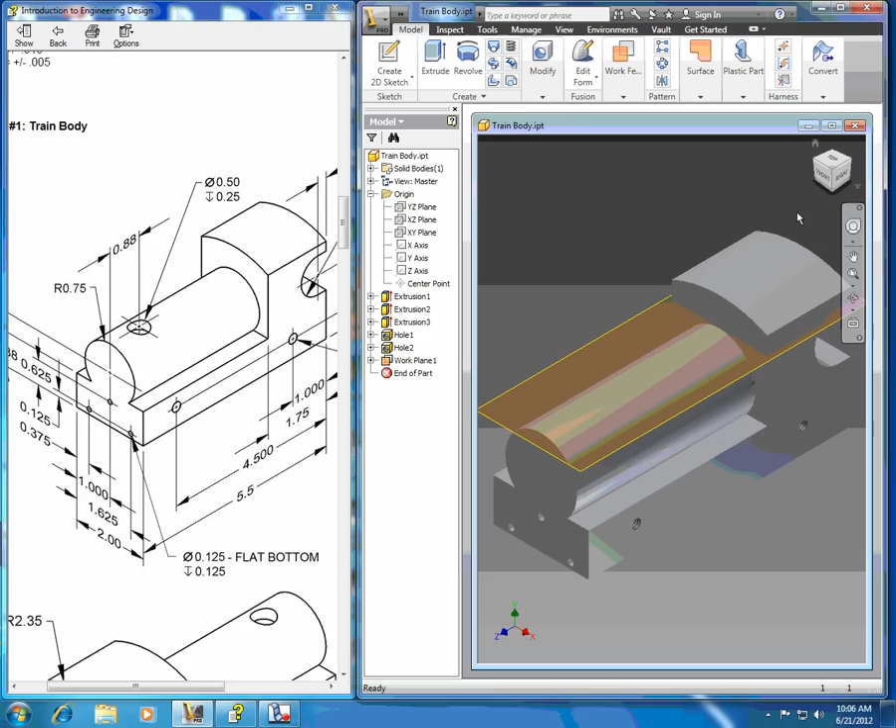So you have to make sure that's selected, make sure you've got the right orientation selected over here under Origin, and then come over with your cursor to the top of the cylinder and then click, and now when you see the yellow, you know that the plane is there. Okay, so that's the first step. And if you want to see it, just click on the front of our navigation cube, and you can see that, yes, the plane is in fact tangent to the top of the cylinder.

Okay, let's go back to the house, back to our isometric view, and let's create a 2D sketch. And we're going to put that sketch right on the plane. To do that, you want to come over, but don't click the plane, you want to click the edge. Okay, click the edge of the plane, then it'll put a sketch surface right on that edge. Okay, so that's the next step.

Now, we want to make sure that our hole is centered and located properly. So what we're going to do now is use a command that's very handy called Project Geometry. Project Geometry takes the edge that's on the surface of the train body and it projects it upward onto the plane. And why do we do that? Well, we need an edge for reference for the dimension. Okay? And we'll do one here. Okay, so now we have reference edges.

So now we can go ahead and put in our circle. Actually, no, let's not put in a circle. Let's put in a point because we're drilling a hole. There. And we want to make sure that it's dimensioned 0.88 from the front, which is from here to here. 0.88.

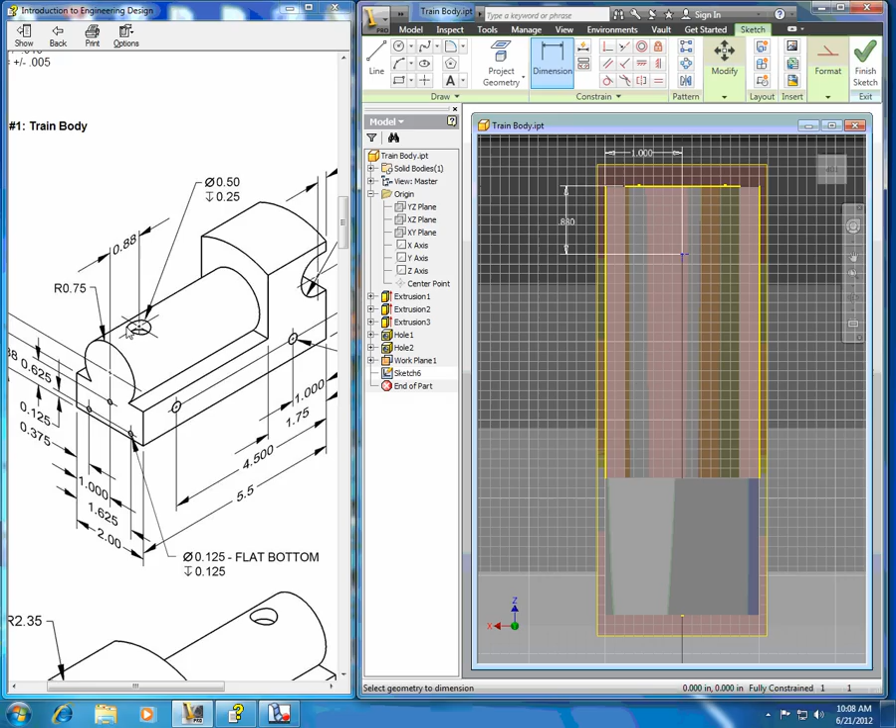And we want to make sure that it's centered. So we're going to go from this edge to the point, and we're going to bring that up. And it is. So we don't have to change that at all. And now we have the center of this hole in the right position. Finish the sketch. Modify, hole. And we need to put in the, so we need center.

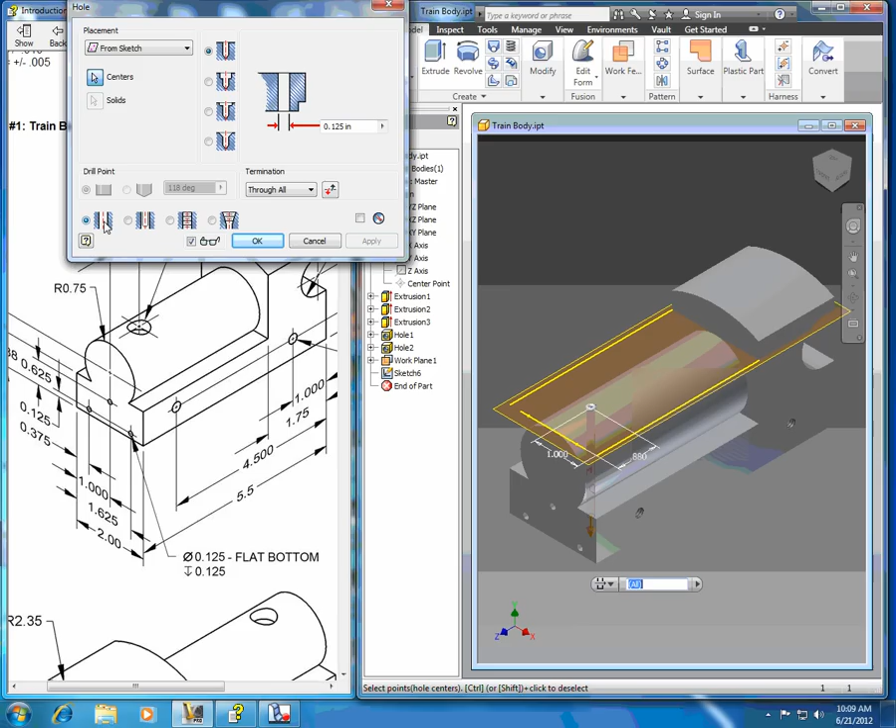And we want to make sure that this is selected here. Okay. Notice that we're still selected untapped. You have to change that. It remembers the last thing you did. Okay, so you got to change that back to this. It's just a regular drilled hole. Okay, but now let's look at our spec. Just click and drag this over for a bit.

This hole has to be 0.5 in diameter, drilled down to a depth of 0.25. And they don't tell us that it has to be a flat bottom. If you use a drill and you're drilling through material, usually the drill is going to have a point to it, and that angle, the included angle of that point, is going to be 118 degrees. Okay, so it doesn't really matter at this point, and I would say if they don't give you a spec, you should just use a standard drill because it's less expensive. You don't need a special tool to do that.

So we have our hole specified here. See centers. We need to put in the diameter, which is 0.5. Okay. Termination. Notice it's going all the way through. Well, we don't want that. We want it to go only to a certain depth. Okay, so we're going to select distance. We want to terminate it at a certain distance. Okay, and that distance has to be 0.25. So we need to put that in right here.

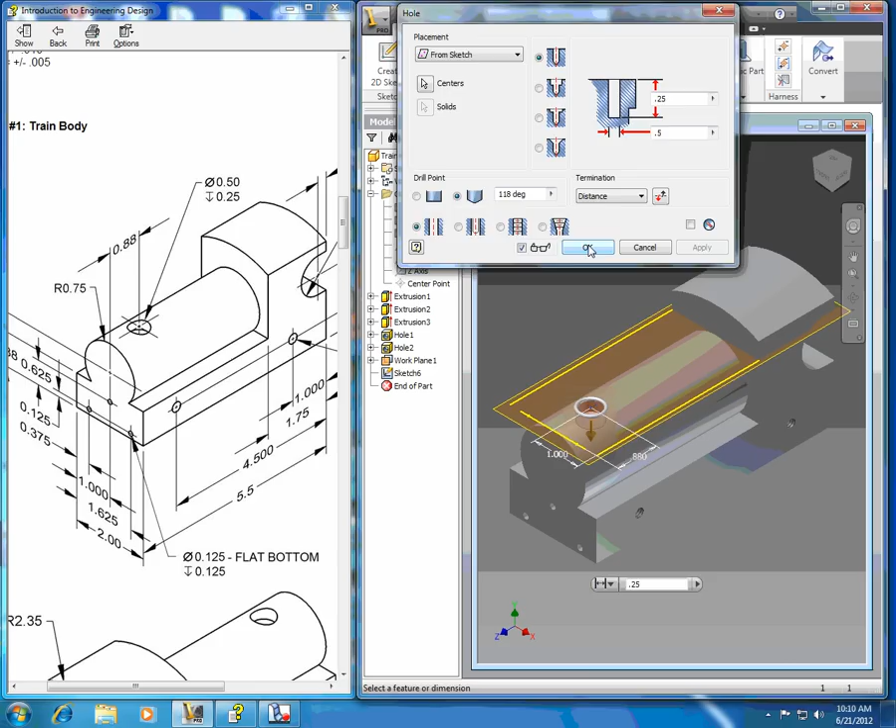Okay, and finally, we're just going to go to a regular drill point. 118 degrees. Just leave that. And that's it. Click OK. And we've drilled our hole. Now, if you want to turn off the plane, you don't want to eliminate the plane, because if you eliminate the plane, you'll also eliminate the geometry that goes with it and the sketch.

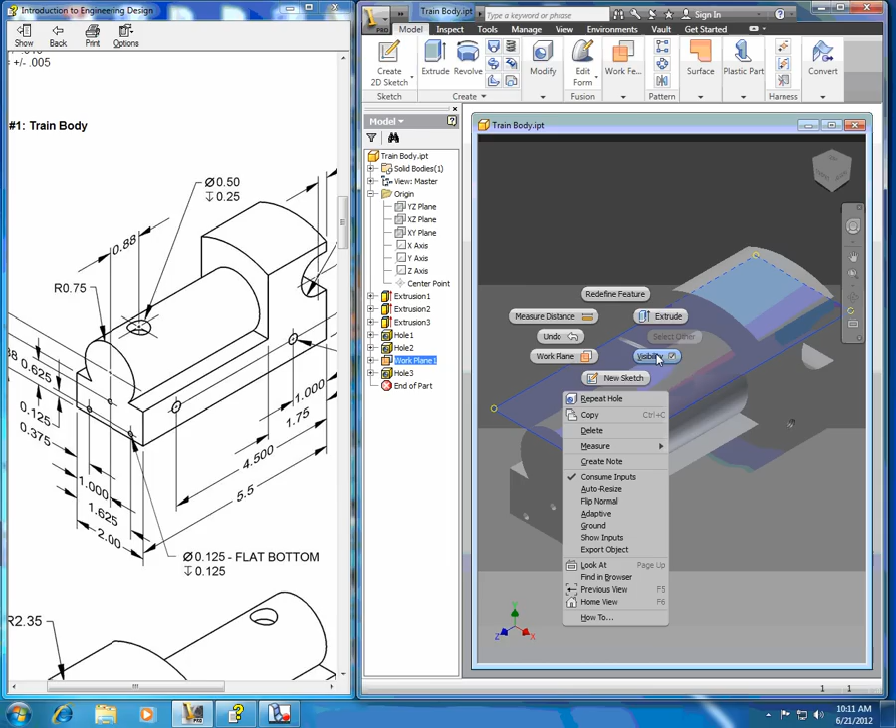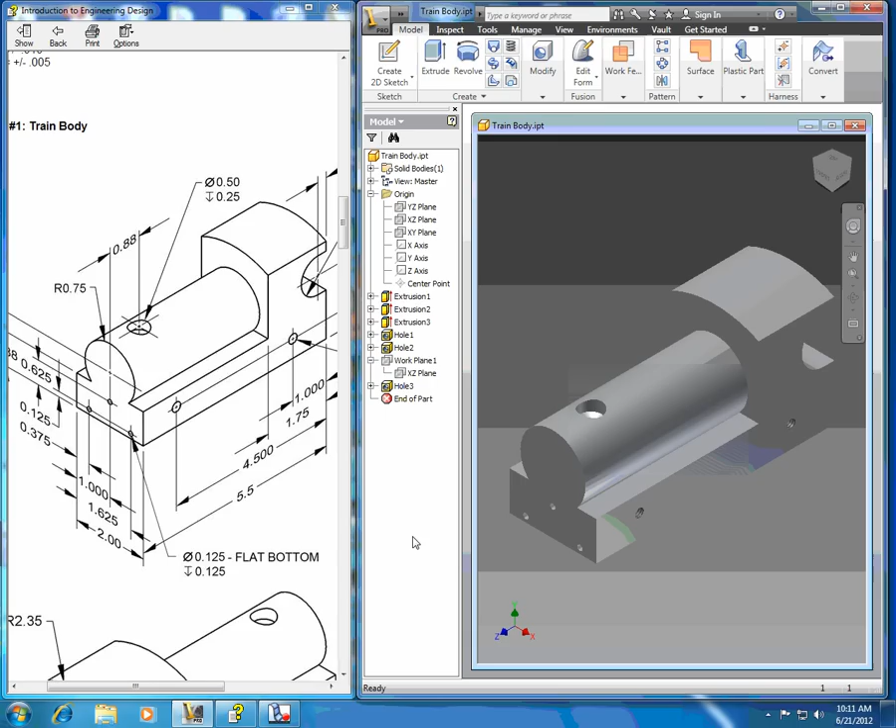So if you right-click on the plane and click where it says visibility, you can uncheck it and you can turn the visibility off. Notice that when you do that, it goes from a colored icon to a black and white icon. That tells you that the work plane is there, but the visibility has been turned off. Okay, and you can turn visibility off on anything, really. If you have a sketch, you can turn it off. You have planes, axes. So if you don't want them to show in your finished model, which you really don't, you can turn off the visibility.

Okay, so now the last thing we're going to do is create fillets. And why do we need to do that? Well, there is a note on here somewhere that tells us that we need that. And that's right here. Round all edges with a radius of 0.1 inches except for the drilled holes. Okay, so when they say round all edges, that means fillet. So let's go to our fillet command, and we're going to have to find it. It's probably under modify. Huh?

There it is. Fillet. Okay, and the way this works is you can just put in the radius right here. Okay, 0.1. All right, so just click on that. 0.1. Now, if you just do that and you notice that the OK light doesn't come on, you have to enter it. So to enter it, you just hit the Enter key on your keyboard. Okay, notice it's entered, and now the OK light still isn't on because we haven't selected any edges.

So let's select, and I like to do this kind of in stages, and sometimes some of these intersections here are kind of hard to build because you have like blended radii from 3 different directions. So what I like to do is click on just the outside edges first. And you're going to have to go all the way around. And then I'll go back in and do all of the inside edges. We're not going to do the holes, just the edges of the part.

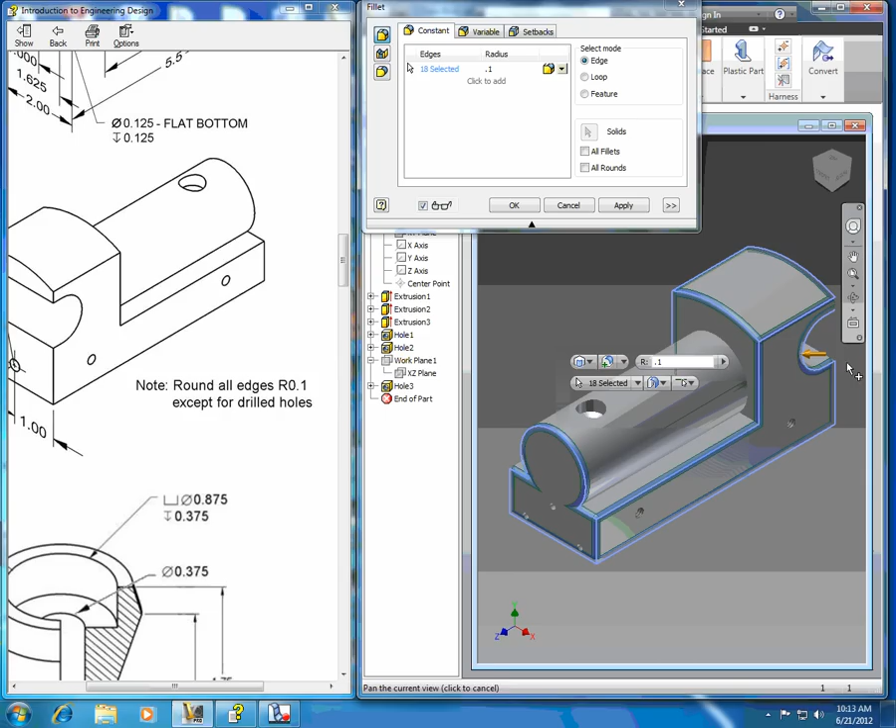And why do we do this? Well, we do this quite often so that we don't have any sharp edges. If this is a toy, you don't want the child to get cut on a sharp edge. Okay? So I'm just turning it around. By the way, the temporary rotate is F4 on your keyboard. So you do a temporary, and then when you let go, it stops. So I like that. I use that quite often.

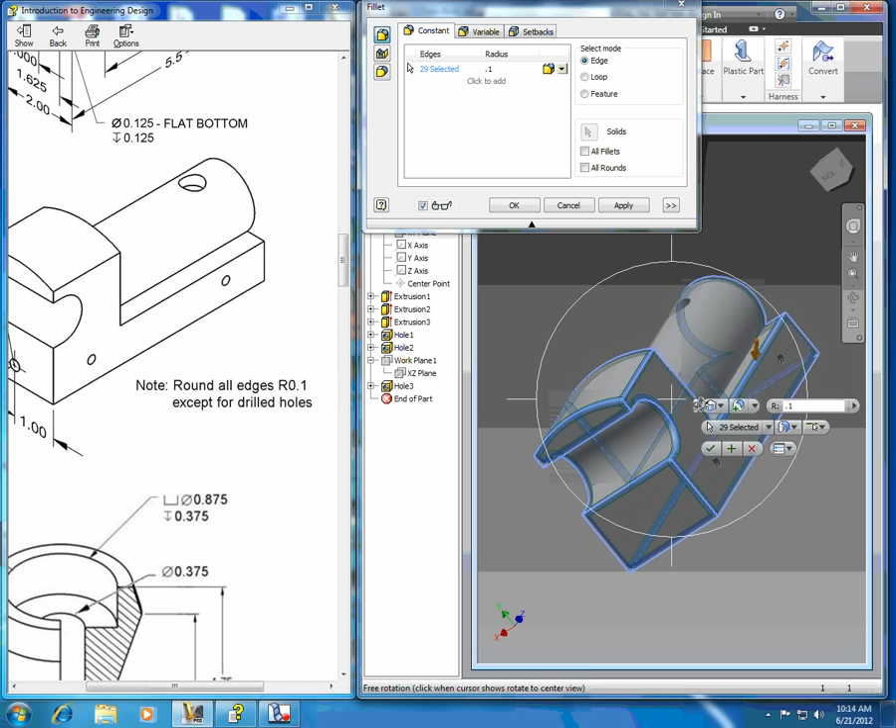All right, so just let's go around and let's get all the edges. Even this little edge right here. This one, and inside here, and this bottom edge, this outside edge right here. Let's see if we got everything. And go around. What I like to do is just go around and just check to make sure I got everything. It gives you a preview of what it's going to look like in the green here. Looks like we got all of the outside edges, which is good. All right, and we're not doing the holes.

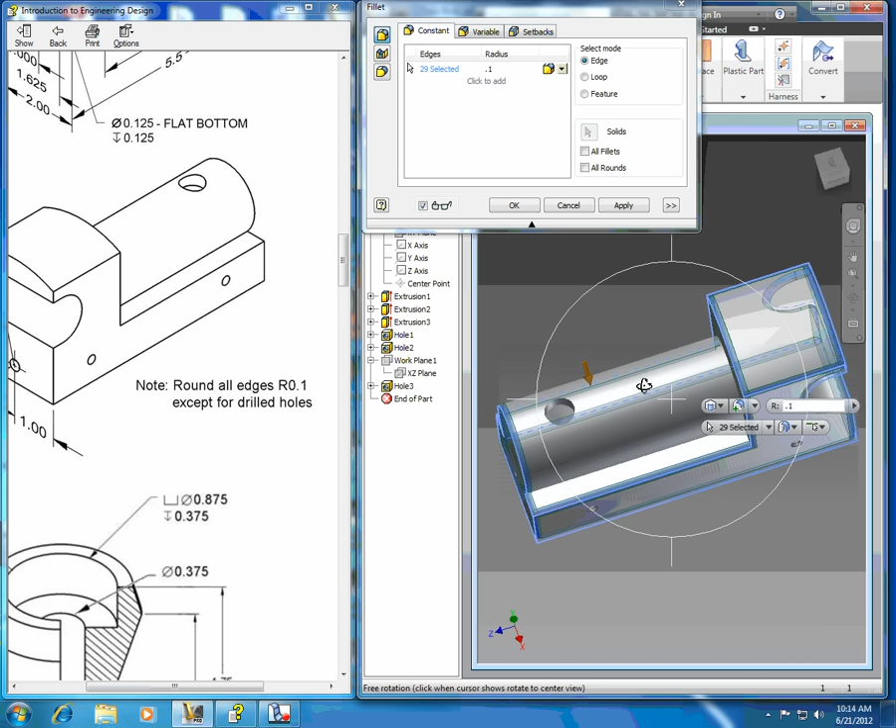And then apply. Now, if you go apply, that will keep this box open, so you can do something else. And if you do this right, you should have 29 edges selected. So if you don't have 29 edges selected, you probably forgot one. You should go back and look for it and just make sure that you got it. Okay? All right. So let's apply that. If you just press OK, it'll do the command, but it'll take you out of the command as well. All right, so let's just go apply because we're going to do another one. All right, good. So it did it, and it's looking nice.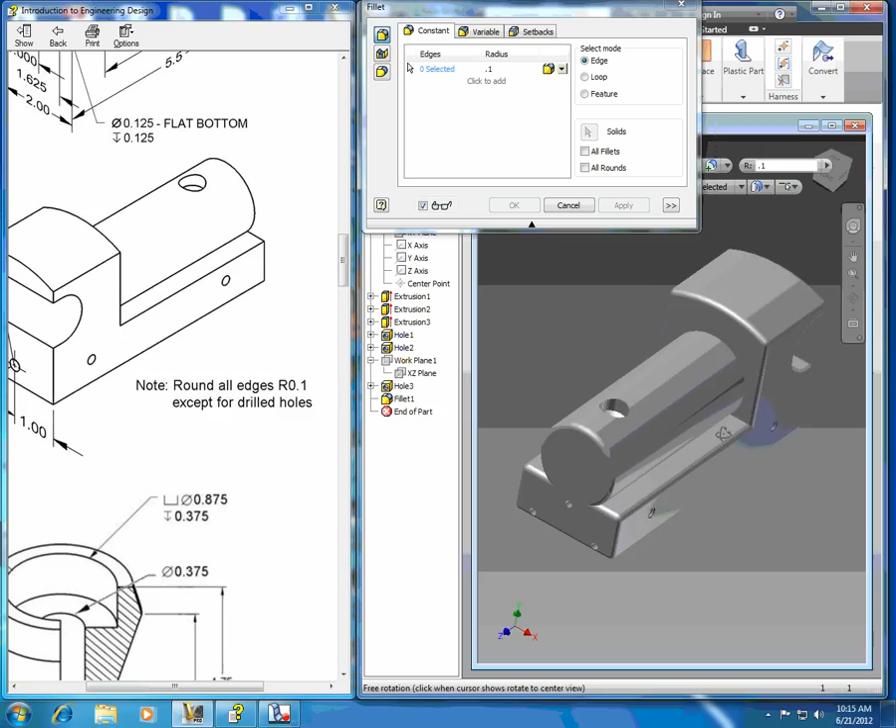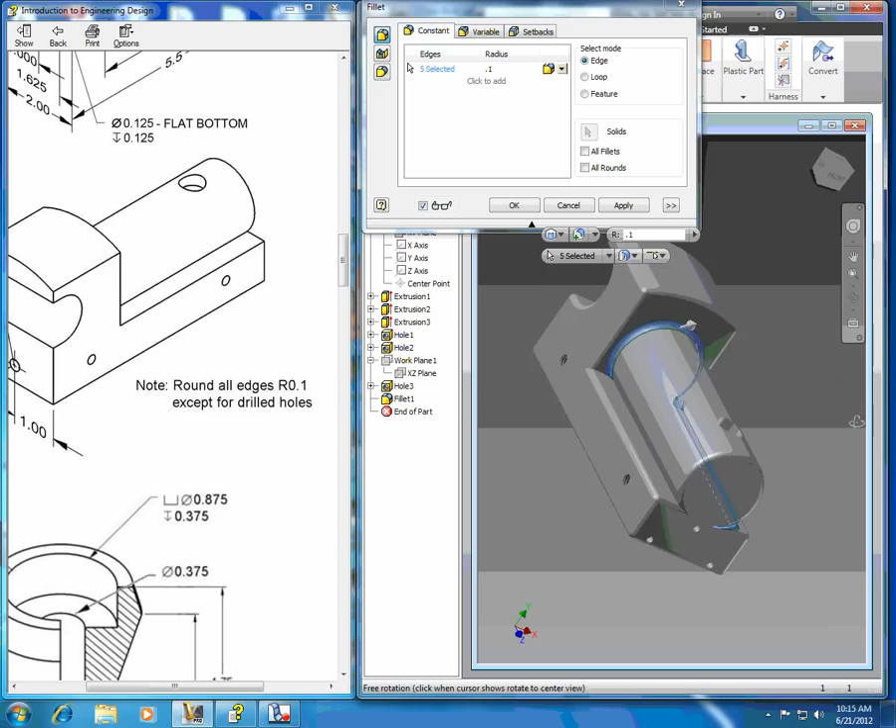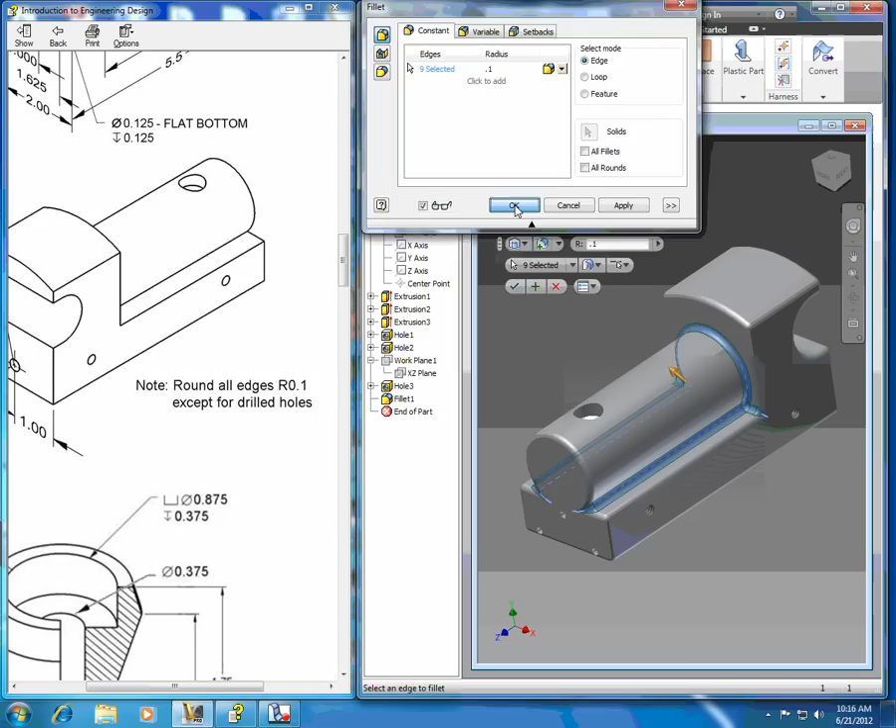Okay. And now we're going to go back in again. Now it's already selected for 0.1, so we're all set with that. So we should be able to just go back in now and select the inside edges. 1, 2, 3, 4, 5. I think there's only 5 of them. So check to make sure. Yeah. 5. And then basically we're done after this, so we don't have to hit the apply. We're going to hit OK. And it does the command. It takes us out of the command.

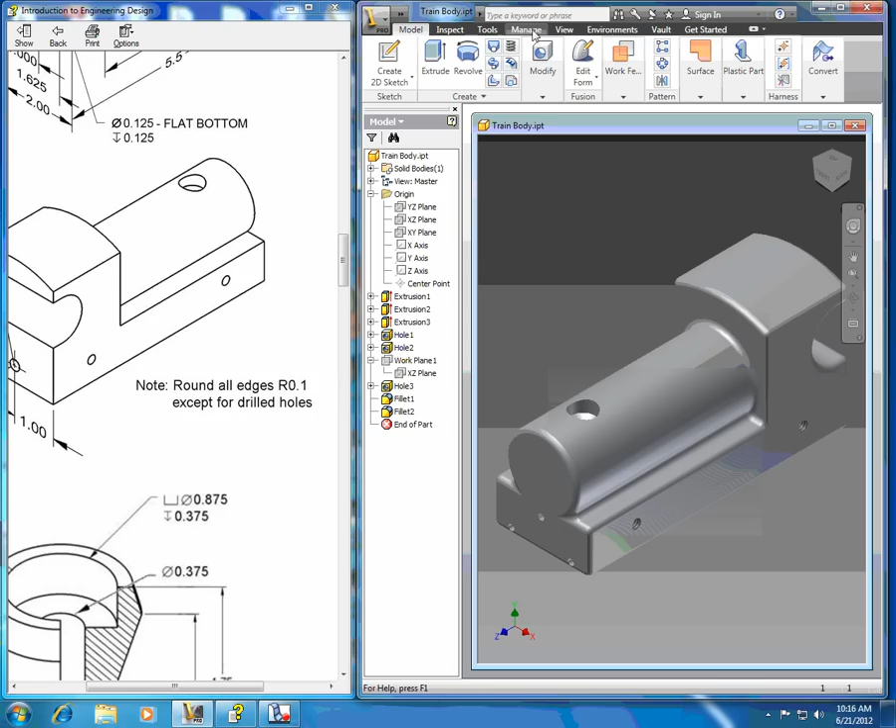And this is done. One last thing you might want to do is change the material. And this is just a material texture. It doesn't change the actual material. I could show you how to do that later. But let's for now just kind of change it to some color. And to do that, we're going to have to expand the toolbar here because I don't see it here. Usually up here it'll say like as material. So let's expand it. Maximize. Okay, and see it says as material.

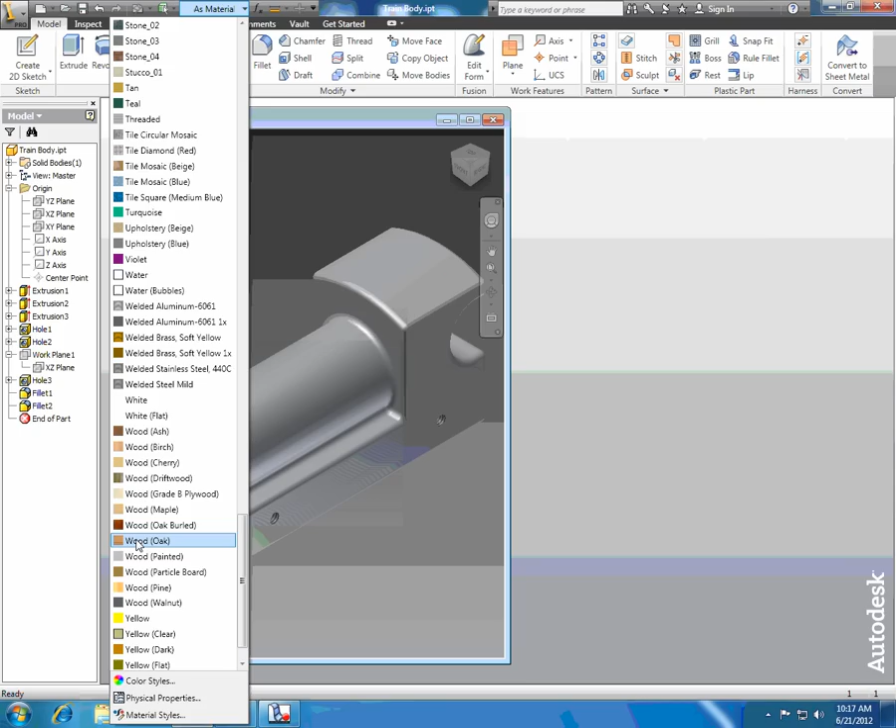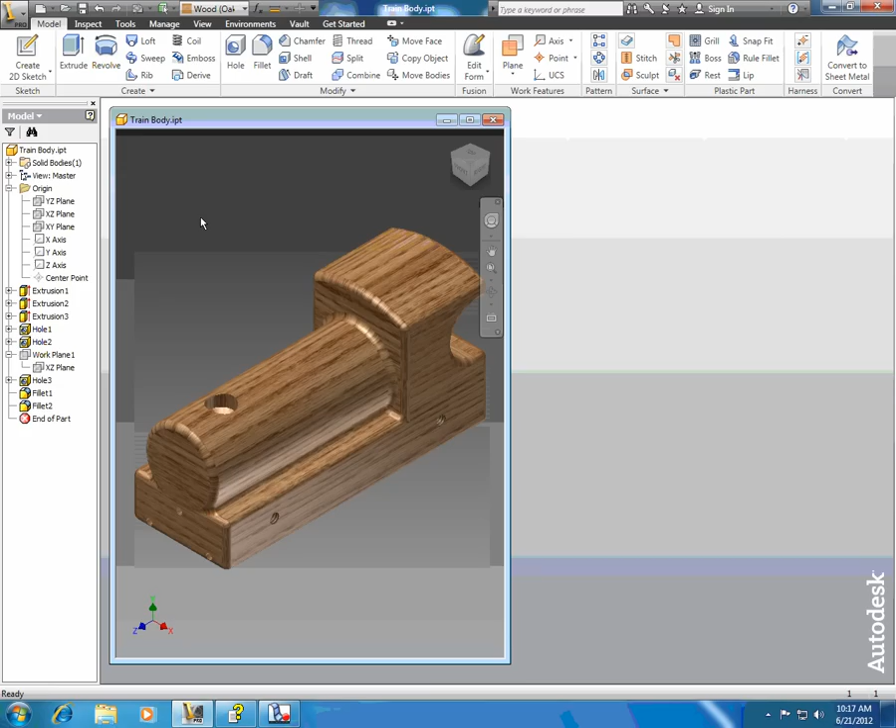So click on that. And remember these are colors. Even though it says wood down below here, it's really not wood unless you create that as a property. But that's for another day. Let's just go with wood oak because I think that's pretty cool. And there you have it. The train body is complete. Don't forget to save. Okay, which is this little floppy disk here. And that's it. That concludes the first part of our train project, train body.